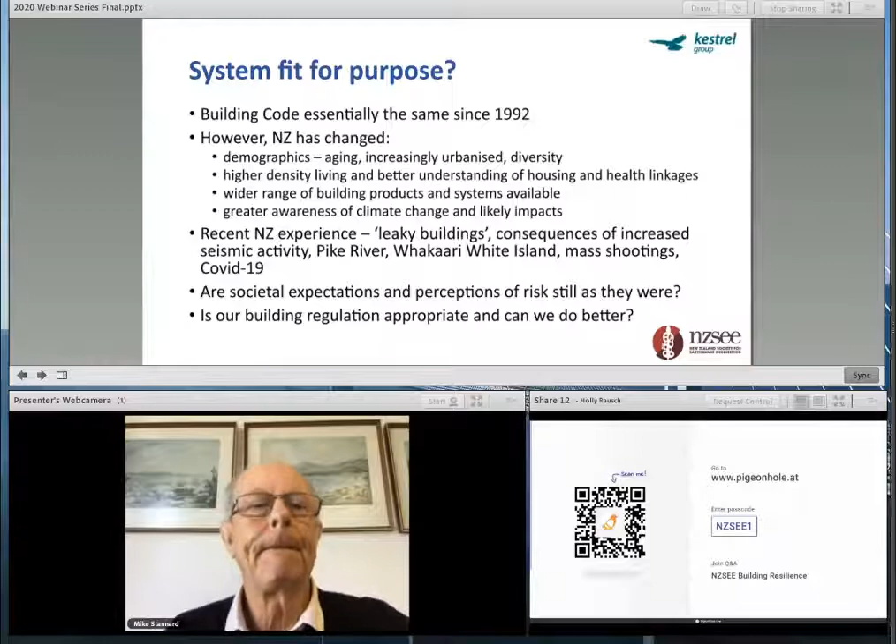I like the quote from the European philosopher George Santayana: those who cannot remember the past are condemned to repeat it. Therefore, a quick reminder of code development history.

The first known building code was from ancient Mesopotamia, 4,000 years ago, the Hammurabi Code. It was pretty brutal - if a homeowner is killed because of the house construction, the builder is killed.

It did perhaps recognise that information asymmetry between builder and owner is still very much a driver for today's codes. More recent drivers for code development have been major events - we've had the Great Fire of London, and a number of earthquakes. Codes have traditionally addressed life safety and health issues, but they're now increasingly being used as an instrument of social policy to help address wider societal objectives, such as well-being, energy efficiency, sustainability, and resilience.

It does need to be remembered that the code is only part of the picture. The building code system is only one part of a much wider system that will influence outcomes. These include commercial arrangements and drivers, New Zealand legal and taxation systems, liability, access to finance, insurance, expectations of users, research and knowledge, land planning, consents approvals process, and the competence and ethics of all parties to the building process.

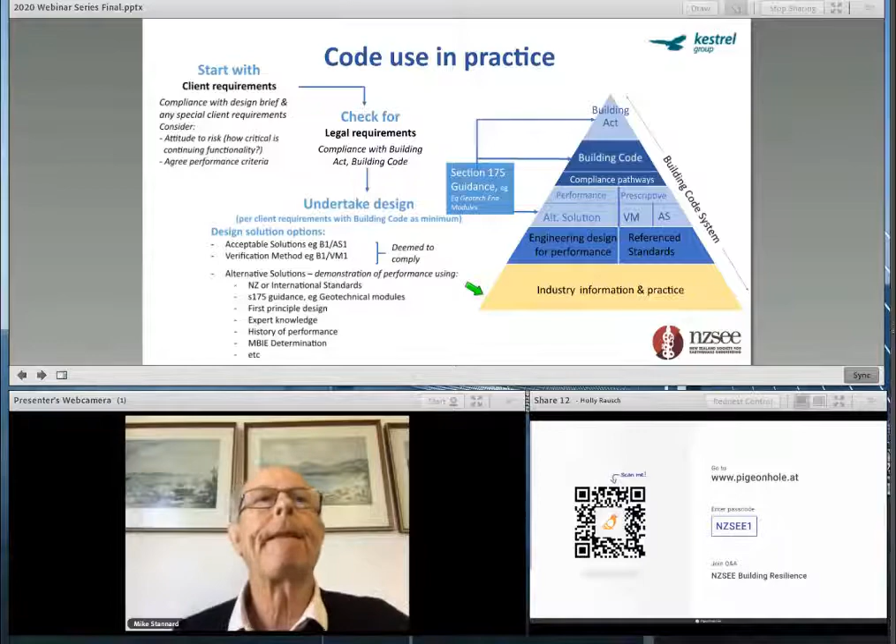So what is good building regulation? The list here is adapted for building regulations from the New Zealand government expectations of regulators. It should reflect societal expectations, recognising the social compact between Parliament and people. It needs to be aligned with other regulatory systems, constitutional principles and treaty obligations.

It needs to be proportionate and fair to all parties. It should be clear, easy to access, and easy to interpret the requirements. It should be flexible, proactive, and evolving, responding to changing circumstances or new information. It's not a set and forget type system.

It should encourage affordable and efficient building practices and promote innovation. And it needs to reflect current knowledge and sector competence and practice. And it's important, as poor regulation can impose costs, limit freedoms, stifle innovation, and give rise to unintended consequences. And there have been plenty of examples of that.

So what's been our New Zealand experience? We've had the leaky buildings issues, costing billions and causing a lot of pain and distress to thousands of homeowners.

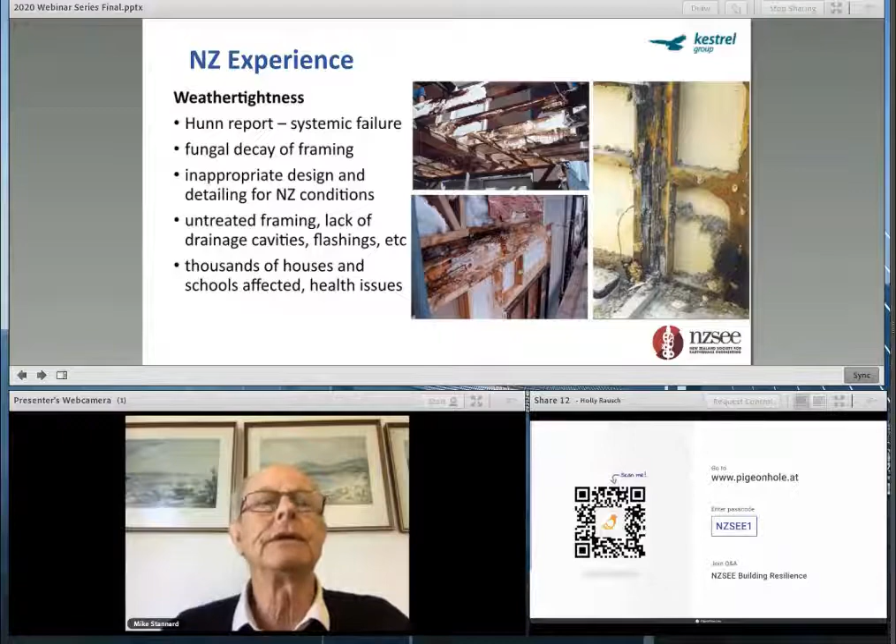We've had a real increase in seismic activity since the mid-2000s, which has led to a much wider awareness of the impacts of earthquakes and the vulnerability of our built environment, than we'd had in the relative quiescence of the second half of the 20th century.

The experience has also led to much greater understanding of building and ground performance and seismicity, and many changes occurred in no small part due to the work of the Canterbury Earthquakes Royal Commission and to the collaborative efforts of the earthquake engineering community. This new learning from earthquakes has been captured and consolidated with important research from the likes of QuakeCoRE, Quake Centre, the universities, GNS, and other organisations, much of it funded by MBIE and EQC.

We can and have learned from international experience, and I would say we must learn from international experience. But it's important to be mindful that the context in other countries can be quite different. The World Bank emphasises the importance of good building regulation, illustrated by developing countries being disproportionately affected during natural hazard events.

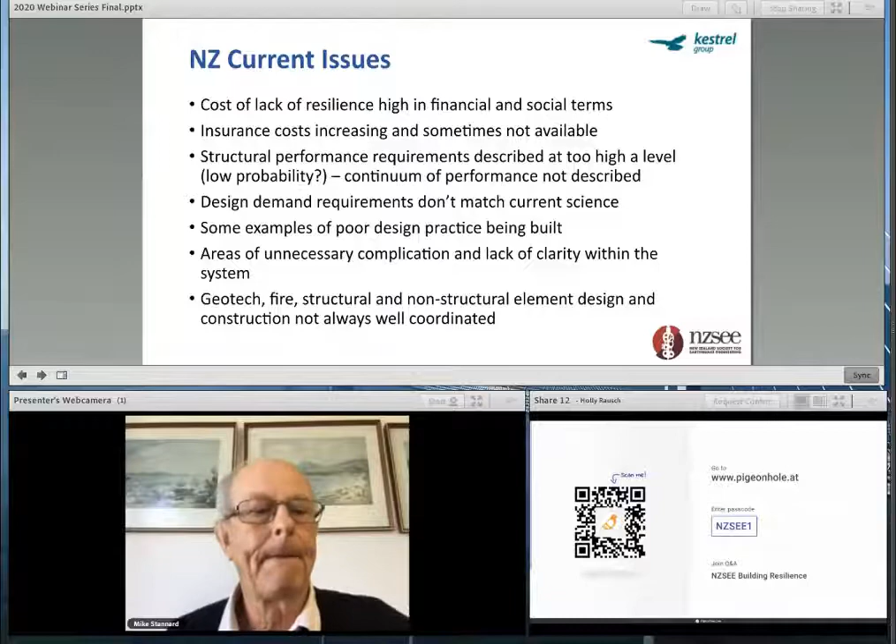I make a few suggestions that I believe will make a difference in relation to seismic resilience and code clarity. Firstly, currently the Act and Code really only address life safety. There should be a debate seeking views from the public about incorporating property protection into our building requirements. The Wellington Mayoral Forum is already calling for this to happen. Japan does it, and we've seen the results.

I've often heard New Zealand couldn't afford this, and it is something we'll need to address robustly. However, on a GDP per capita basis, Japan and New Zealand are very similar. They can do it. Why not us?

Secondly, I've mentioned the trend internationally is to have performance-based building regulation, but with better definition of performance somewhere in the code system. What do we mean by low probability of rupture? This is currently left to standards committees to define, when it's a public policy issue and should not be their responsibility. However, getting too prescriptive in a mandatory code requirement is fraught, as predicting earthquake performance is very difficult. We've had this before when more prescriptive criteria were added into the fire code, causing considerable unintended consequences.

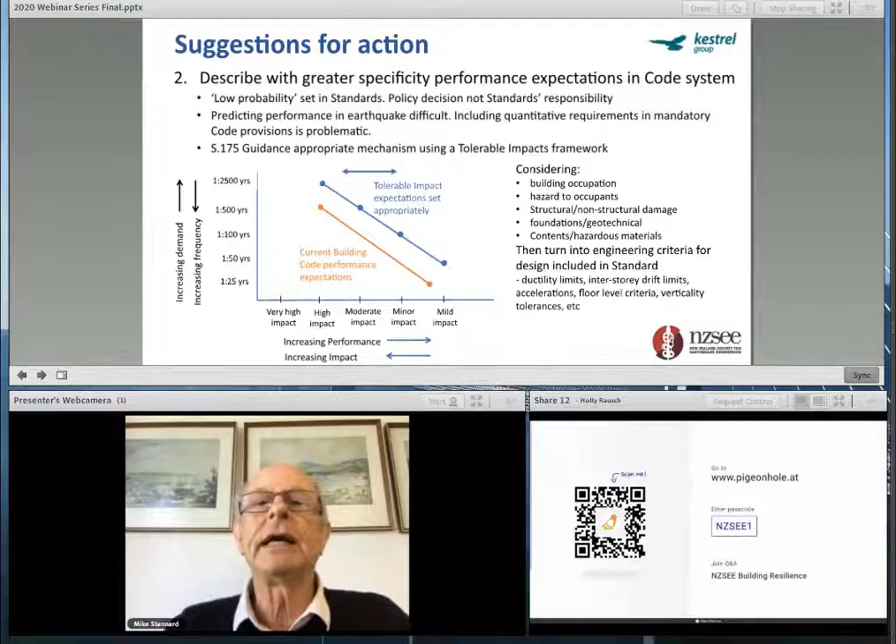Rather than being included in the code, I'm suggesting that could be signalled in statutory Section 175 guidance, providing direction to standards committees to turn these descriptions into engineering criteria and limits. The power to issue guidance was added to the 2004 Act specifically in response to the lack of clarity about weather-tightness issues. Let's use it, or some other non-mandatory mechanism, to provide greater clarity.

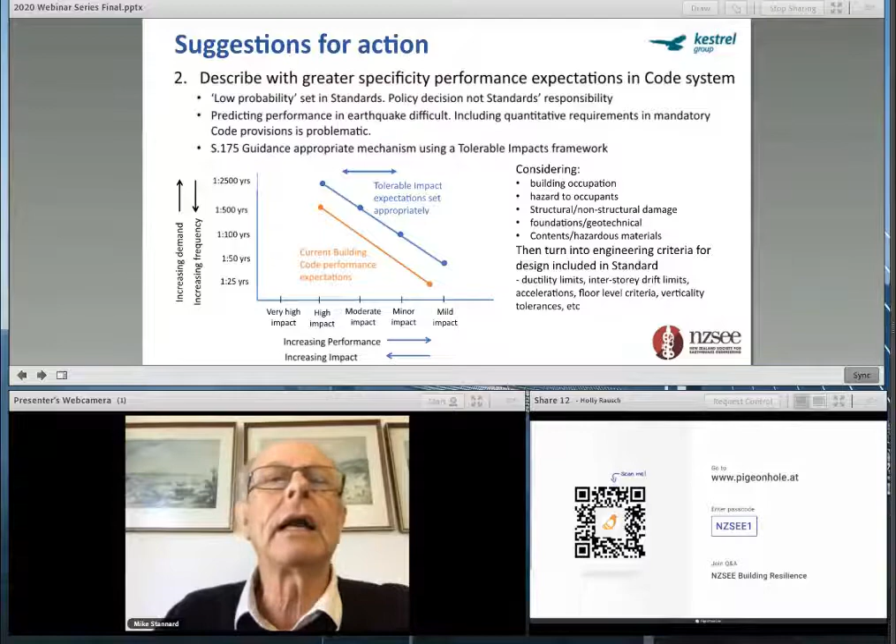Very briefly, I add three other suggestions. Thirdly, review and consolidate all the building classification systems currently included in the code system to simplify and provide greater clarity. Additionally, the classification should consider the impact that the building has on other buildings and on the wider urban environment. Which buildings are really the most important that should be designed more robustly?

Currently, there are at least six different classifications within building controls, let alone anything else outside of the Building Act. You've got two lots of importance levels, either the A3, or 1170 for structural, and they're not identical. You've got risk groups for fire, change of use provisions, and risk groups in F6 visibility and means of escape. These silos are confusing, unnecessarily complicated, and only consider a building singly, not how it interacts with other buildings and the community.

Fourthly, introduce a random audit system of designs to improve code compliance. And fifthly, undertake a fundamental design review of design standards and verification methods, aligned with the tolerable impacts set per suggestion two, and classifications per suggestion three.

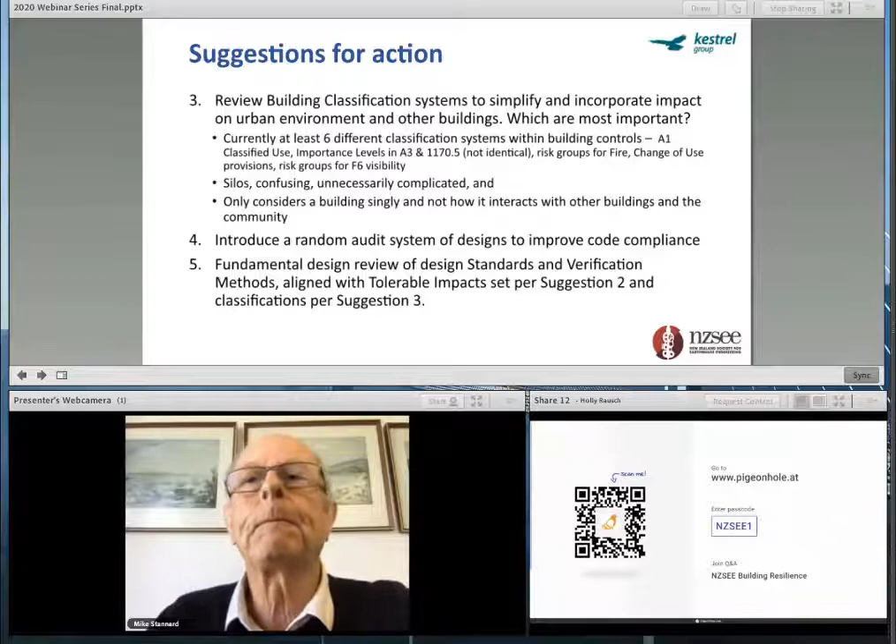Change isn't easy, but I'm reminded that I have heard the piercing screams of a woman already traumatised by the Darfield earthquake, desperately trying to escape from the high-rise Christchurch Central Police Station during a major aftershock. Some of us have listened to the families of victims of the Christchurch earthquake, asking why. Many of us have experienced, either directly or indirectly, the stress, anxiety, and anger of having to repair or rebuild homes damaged by earthquake or leaky building issues. All of us will hope that our children or grandchildren will not, in the words of Santayana, be condemned to repeat our experience.

The opportunity is now. It needs boldness, imagination, and informed evidence. A partnership is required, with MBIE as the steward of the system, the sector providing coherent and informed advice, and a wider collaboration with all community interests. Let's do it for the sake of New Zealand's health and well-being.

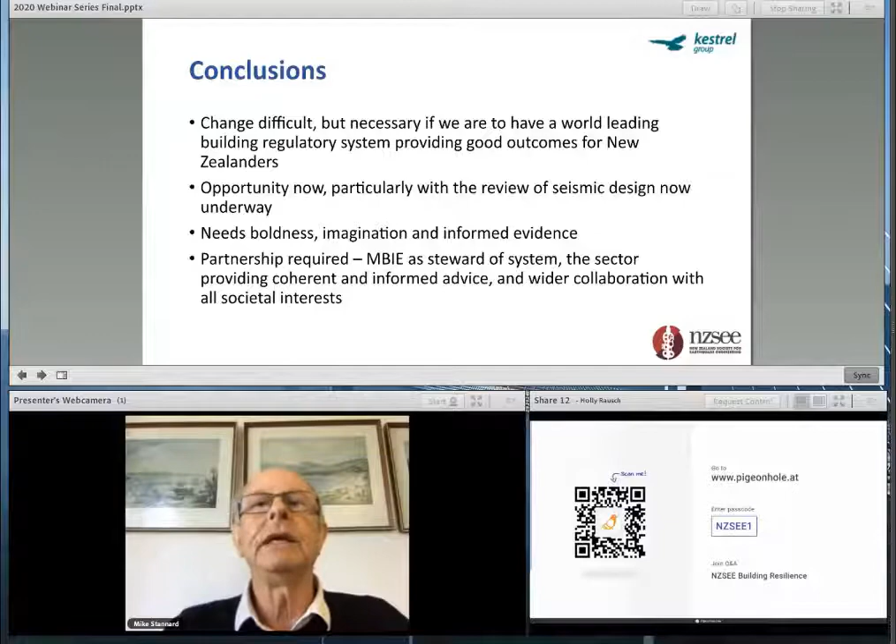Kia ora koutou, welcome and thank you for the opportunity to speak at this seminar. I'm Jenni Tipler, Engineering Team Leader with MBIE's Building System Performance Branch.

MBIE's Earthquake Engineering Work Programme is about doing the right things and prioritising the work that will have the biggest impact, remembering that as public servants we are here first and foremost to serve the public. Making sure that we're looking across the whole building system, from existing buildings to new buildings and buildings of the future, and never losing sight of the reason we do what we do, which is to protect people from harm.

But it's also about doing things right, ensuring that our work is part of a well thought out strategy and that we're taking the best approach. This means we have to leverage all of the resources at our disposal. My team has 8 engineers, and that's not nearly enough for us to make the changes that need to be made alone. Doing things right means reaching into the sector for advice, expertise and wisdom that far exceeds our own, and creating partnerships that enable us to transform the way that buildings are designed and constructed.

MBIE take our Earthquake Engineering Work Programme seriously. We have a well thought out strategy and approach that will evolve as we learn and continue to refine it. But it represents a big focus for my team and a considerable investment of time, money and effort.

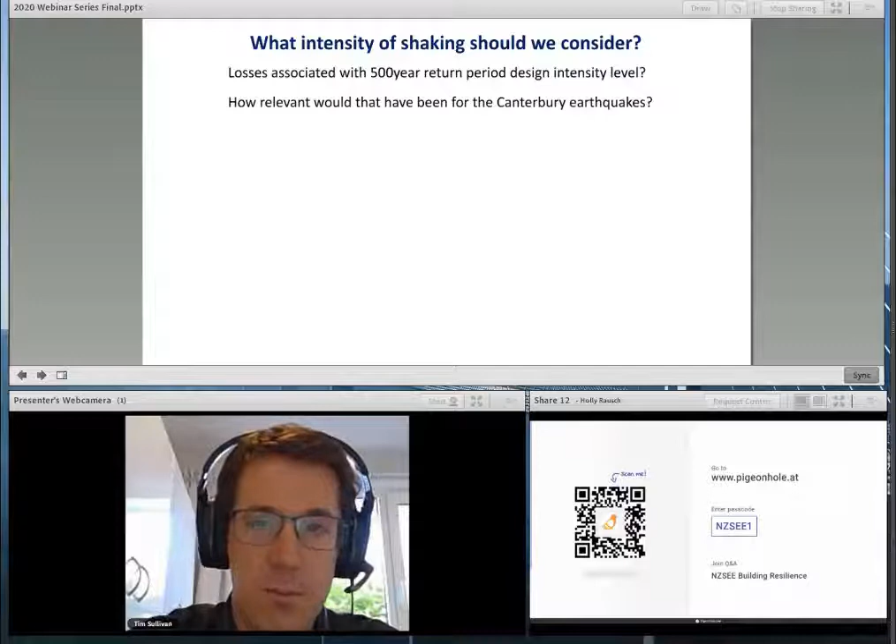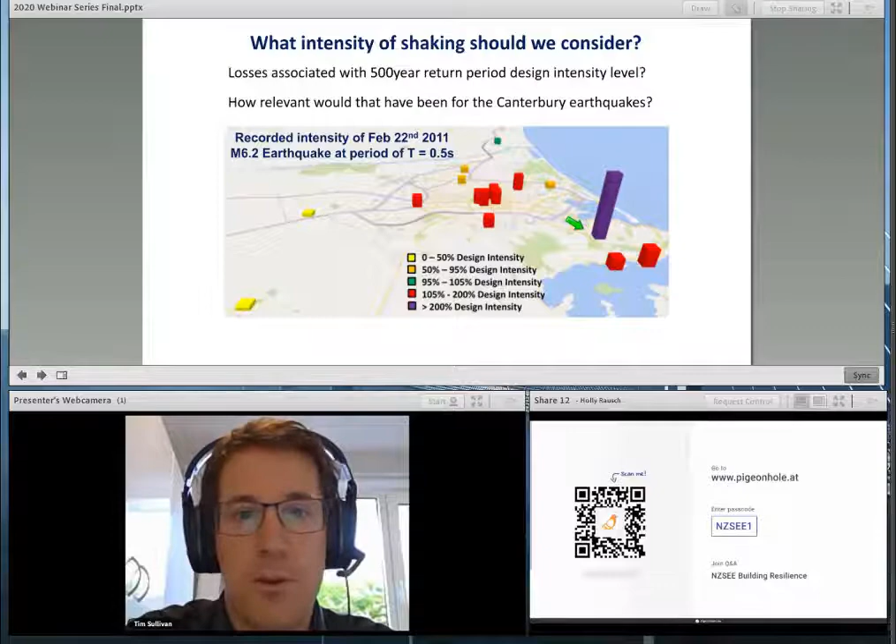If we instead went to a period of 3 seconds, the picture changes completely. We can see that the site that was previously 6 times is now at the 500-year intensity level. So why am I highlighting this?

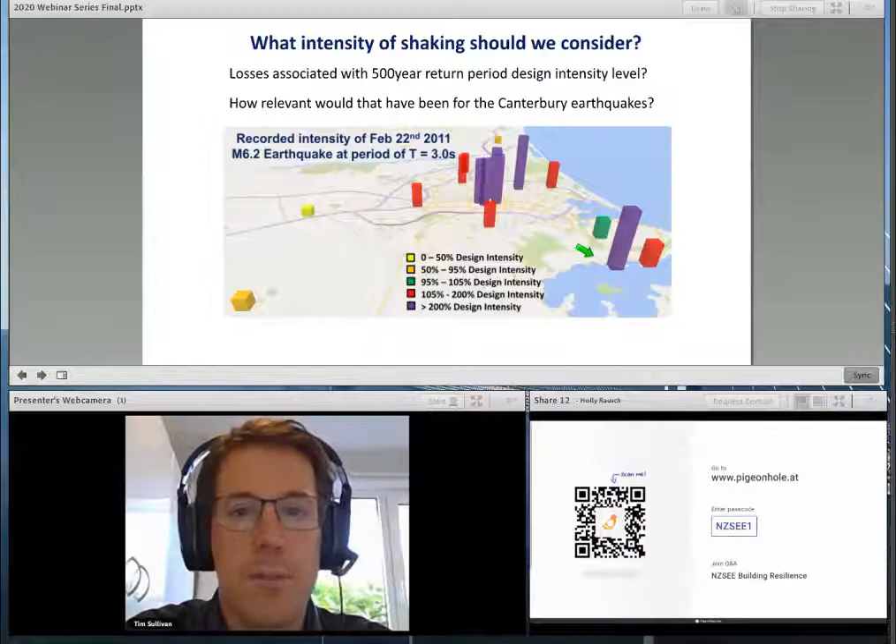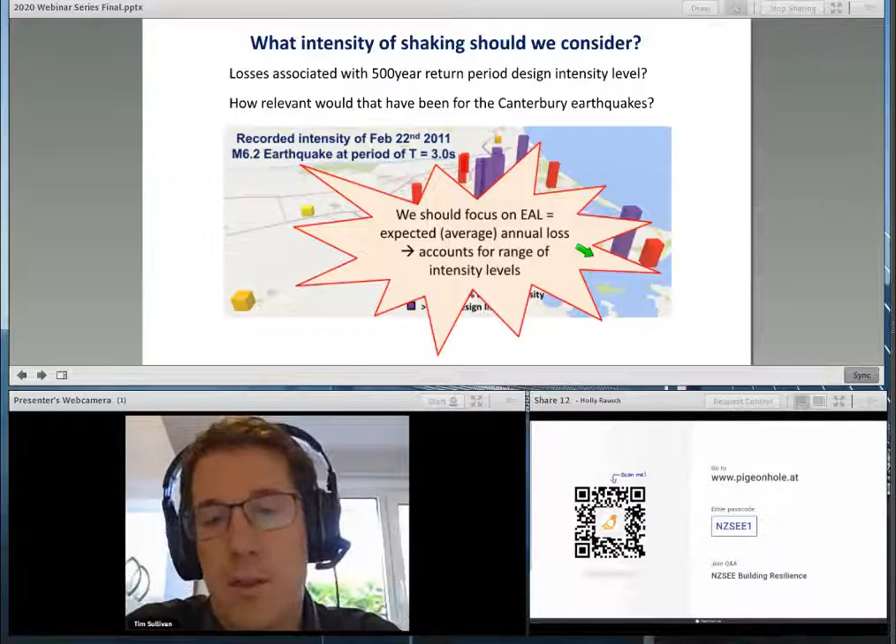The main point is that in an earthquake, we have a whole range of different intensity levels, and for this reason it makes little sense to talk about losses at a specific intensity level. Instead, we should be looking at the expected annual loss, sometimes referred to as the average annual loss, because this is a loss measure that accounts for a whole range of intensity levels expected at a site.

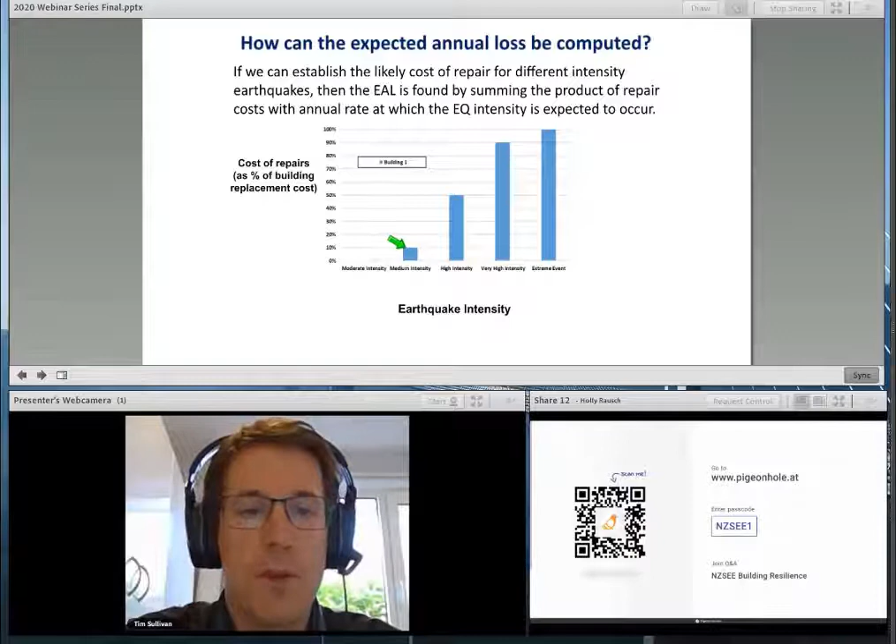So how is the expected annual loss computed? If we have information as shown in this picture, which shows the cost to repair a building as a function of earthquake intensity, you can see 5 different intensity levels here. If we had a medium earthquake intensity, we'd expect the cost to repair the building to be about 10% of the replacement cost. If the earthquake intensity is high, we think the repair cost is about 50% of what it would cost to replace it, and so on.

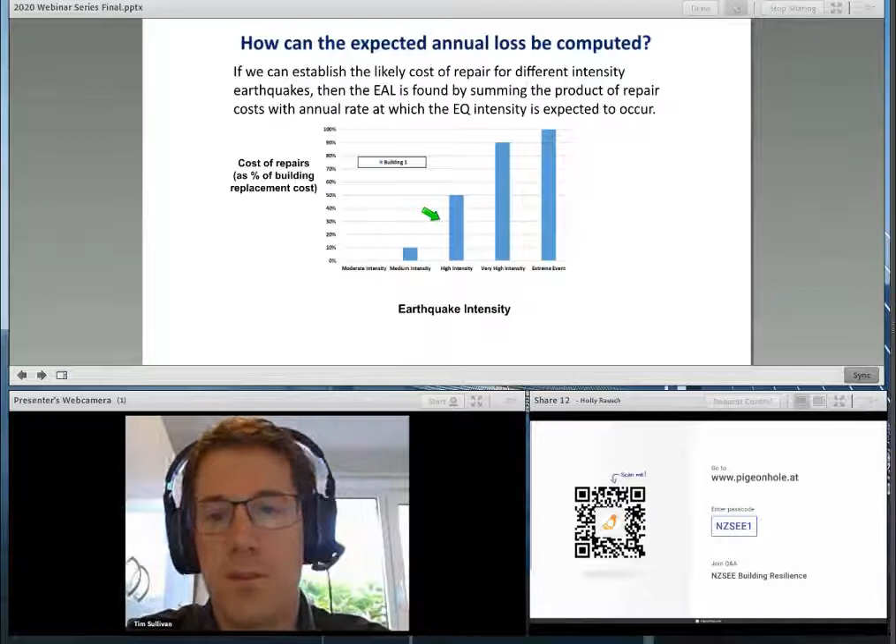Now, with that sort of information, if we combine it with the rate at which we expect that earthquake intensity to occur, we can multiply the numbers together and work out our expected annual loss. So it's simply 1 on 25 times 10%, plus 1 on 400 times 50%, and so on. We sum those up and get, in this case, an expected annual loss, or average annual loss, of 0.66% of the building replacement cost.

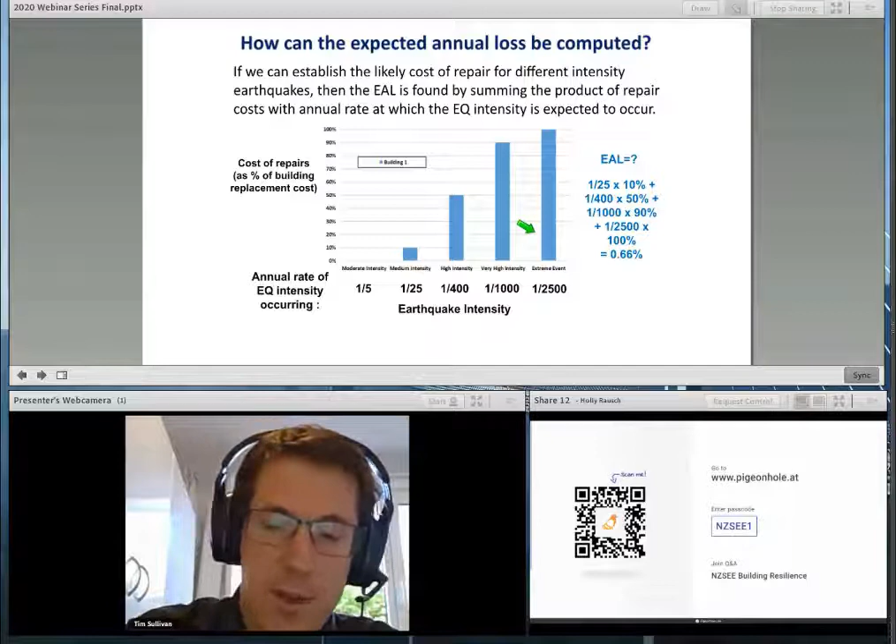So then the question is, how would we establish a relationship between the repair cost as a function of intensity? We do that through a 3-step process, which is what we've been doing in our research. First is structural analysis, where we build a model of our structure and ask what drift we expect if the earthquake intensity is, say, 0.4G at the period of vibration of the structure.

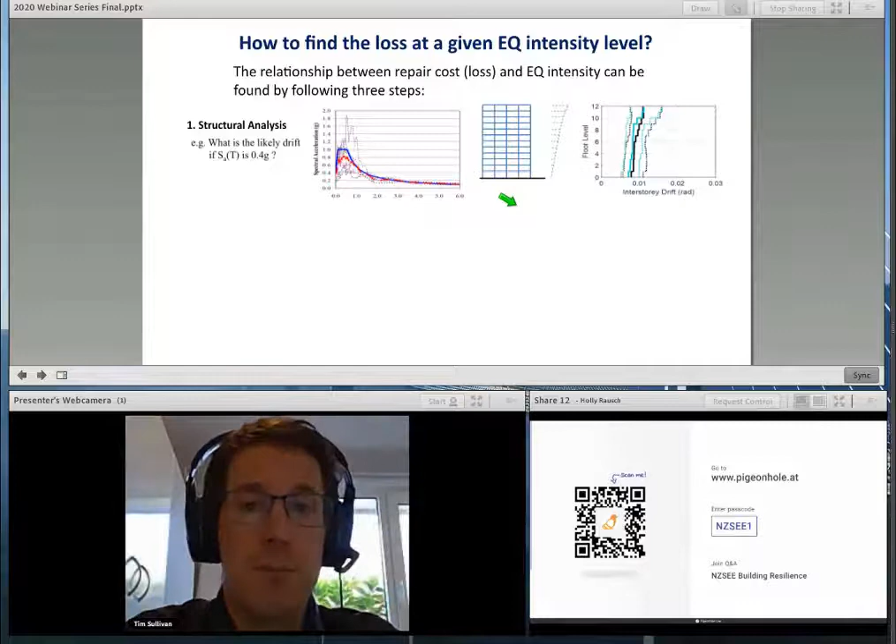We select ground motions compatible with that intensity level and run time history analyses to work out drifts and floor accelerations, which become inputs to the next part of the assessment: damage analysis. That's where we say if the drift is, say, 1%, what is the likely damage to, for example, a partition wall? Of course, we need to consider all damageable components in a building.

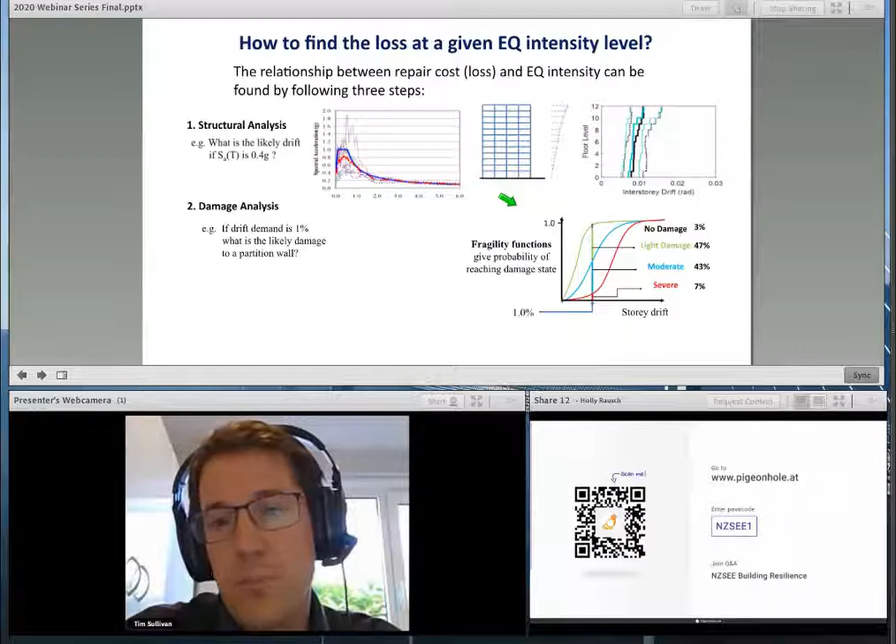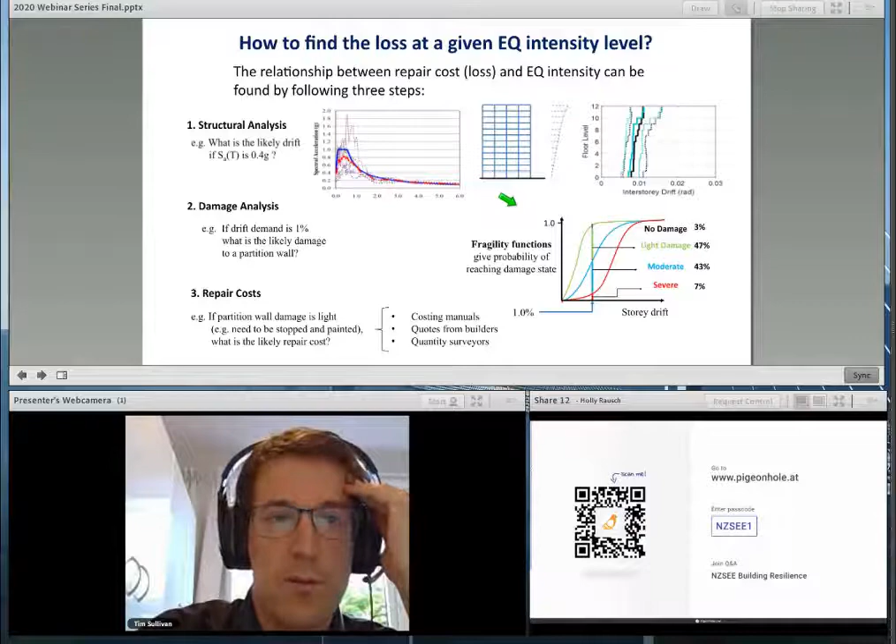To do this, we need information on the fragility of the components. These could be fragility functions for partition walls, and we read in our drift of 1% to get the probability of being in a certain damage state. If we identify, say, light damage, we go to the next step: repair costs. For a partition wall with light damage, we might need to stop and paint the walls, and we estimate the costs of that work. Through this process, we can estimate the cost of repairing all components at that intensity level, and repeat it for all intensity levels of interest.

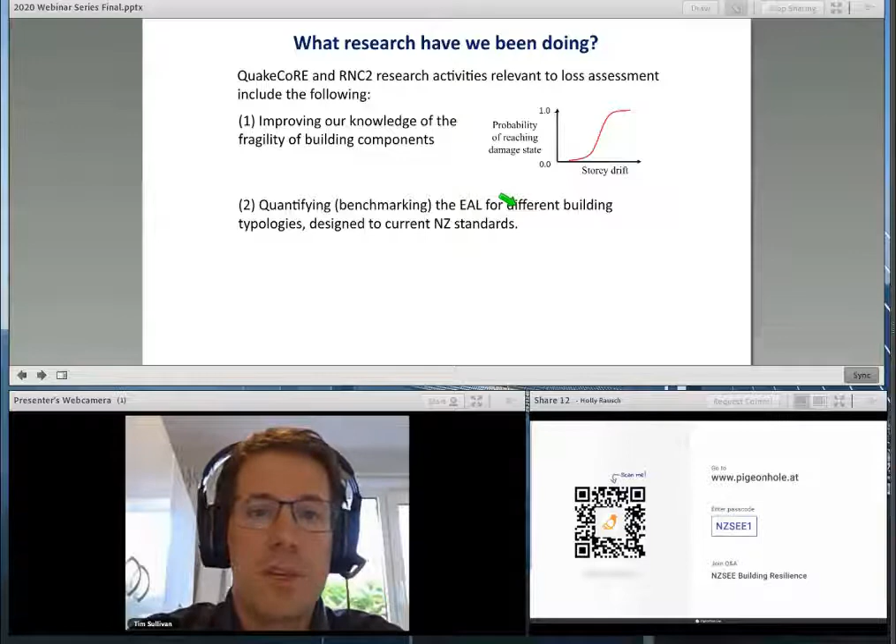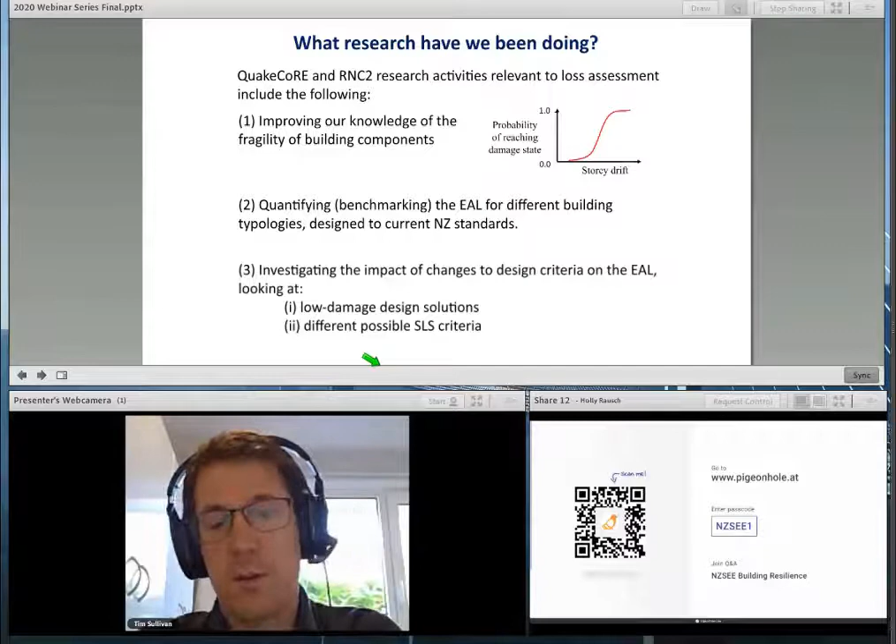So what research have QuakeCoRE, and now the Resilience to Nature's Challenges, been doing in relation to loss assessment? We've been doing three things: improving our knowledge of the fragility of building components, quantifying or benchmarking the expected annual loss for different building typologies designed to current New Zealand standards, and investigating the impact of changes to design criteria on expected annual loss, including low damage design solutions and different possible serviceability limit state criteria.

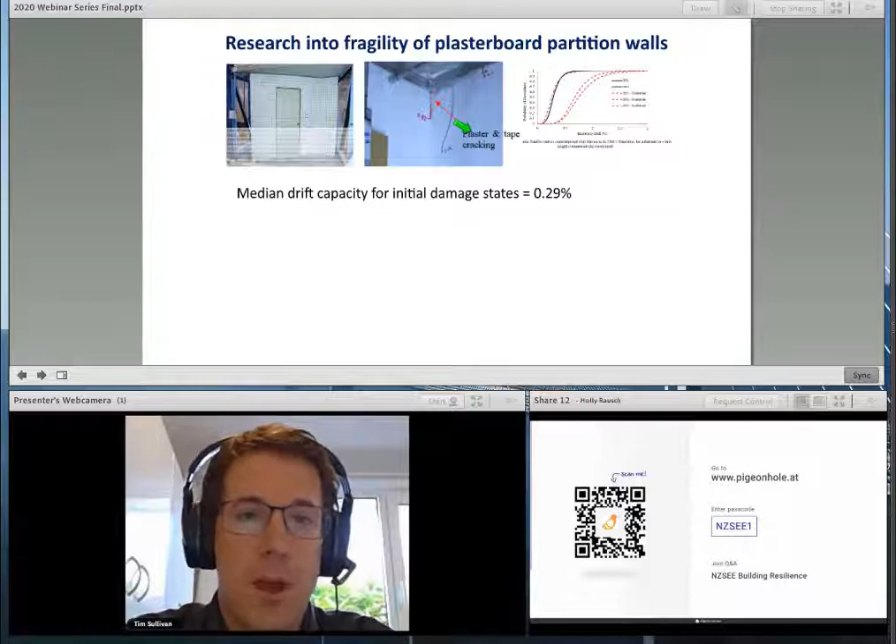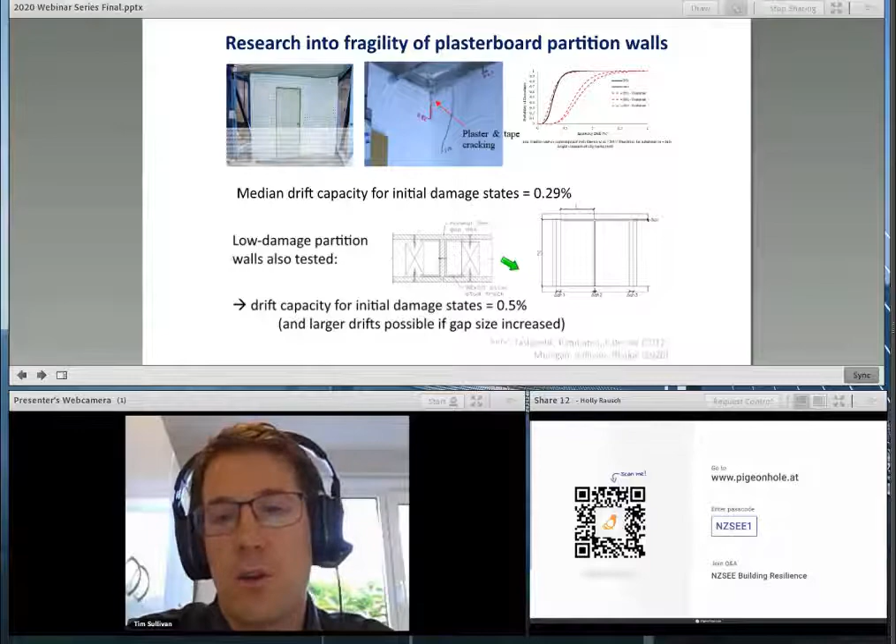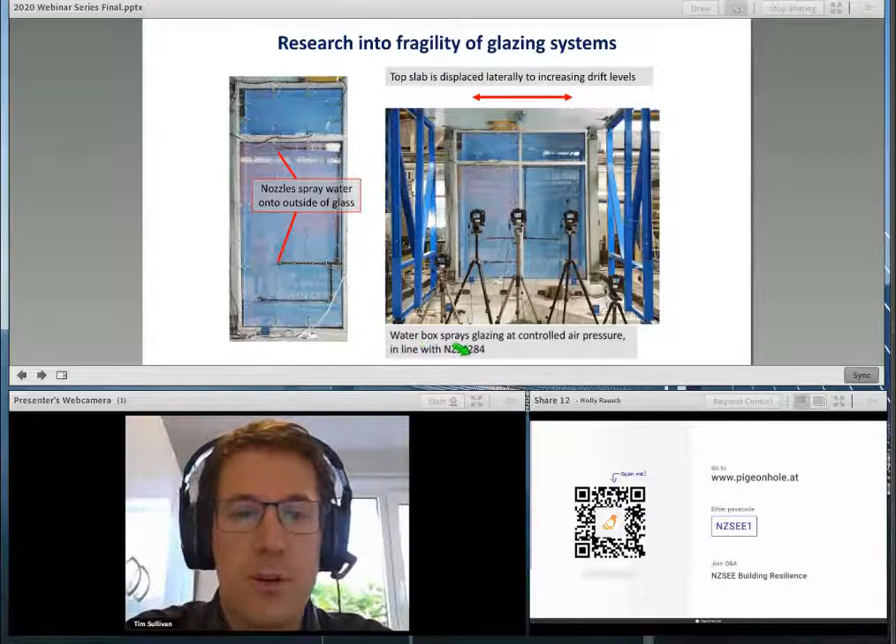Another interesting study in fragility looked at commercial glazing systems. This is a photo of a 3.6 metre commercial glazing system, fairly standard in New Zealand. Behind it is a water box with nozzles designed to spray water onto the glazing. In this test, we racked or displaced the top floor laterally to higher drifts, and after every couple of cycles at a certain drift level, we would spray the glazing at a controlled air pressure in line with New Zealand standard NZS 4284.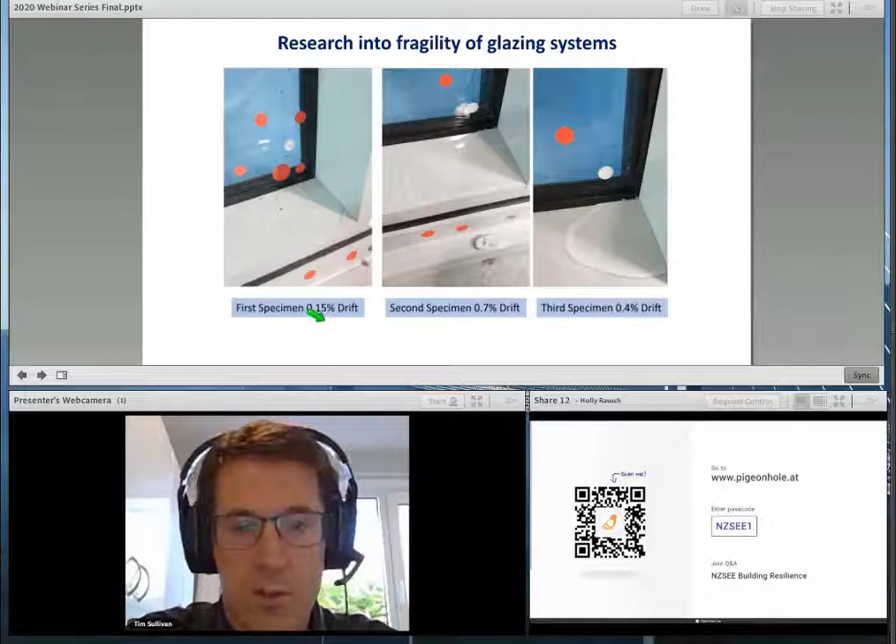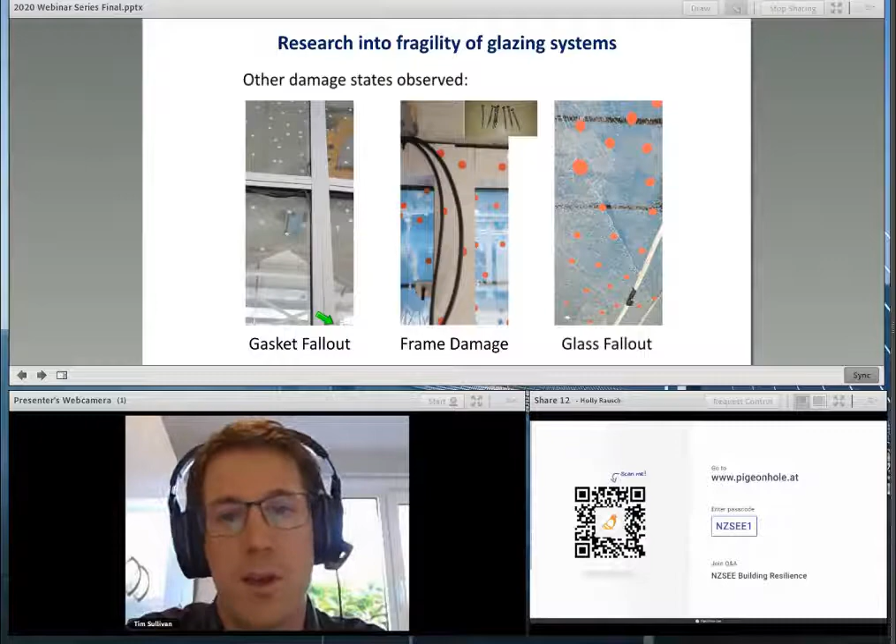From that process, we tracked the drift at which we start to see loss of water tightness. For some specimens, this occurred at reasonably low drifts—one as low as 0.15%. Of course, as we go to higher drifts, we see more signs of damage: gaskets falling out, glass breaking, and so on. But those damage states don't occur until much higher levels of drift.

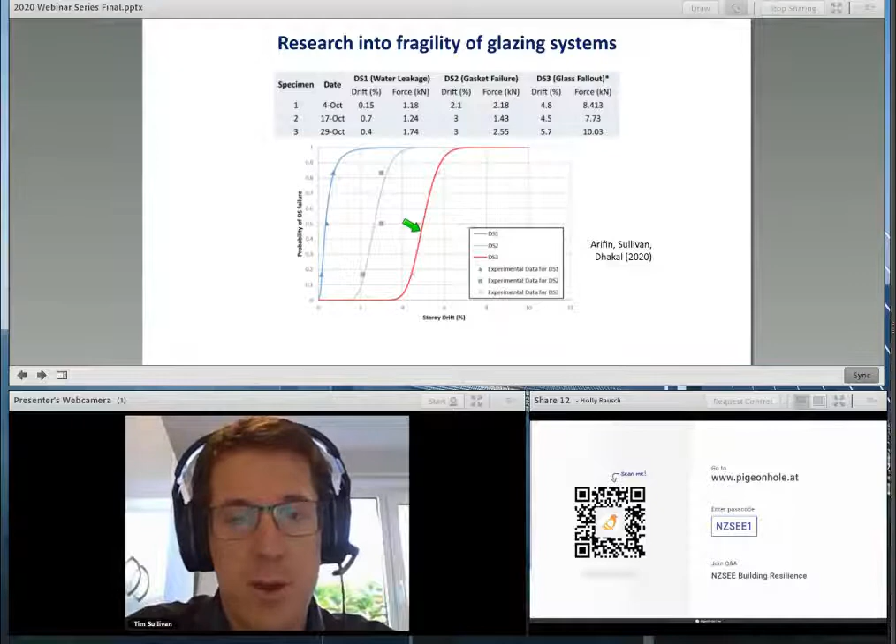This is a summary of results for that first series of tests, and we saw drifts up around 5% for a life safety issue. So life safety is not really a concern if we can sustain about 5% before the glass breaks. But serviceability is an issue, because the median drift capacity for this glazing, for loss of water tightness, was 0.35%.

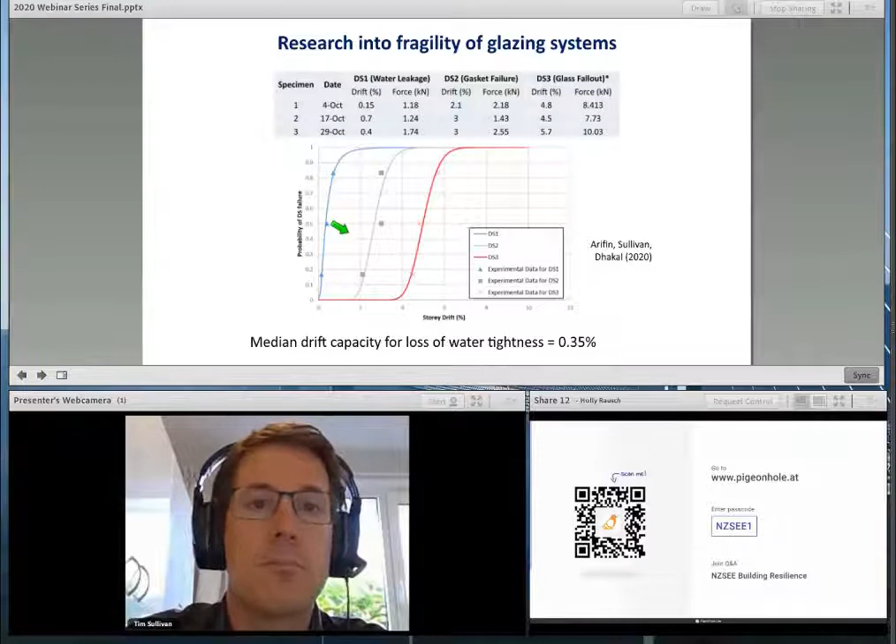Other research of relevance for loss assessment was looking at losses in terms of quantifying repair costs knowing the damage. Professor Dhakal's been doing quite a bit of research in this field.

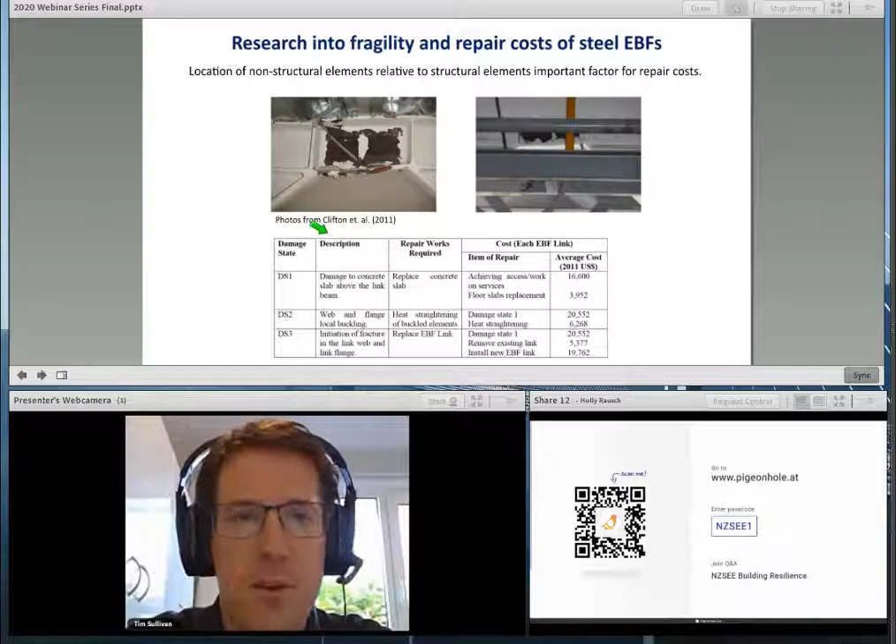This specific slide shows research building on work done by Clifton et al. on EBF systems, where we recognised, talking with industry, that the cost to repair these links is greatly affected by how easy it is going to be to access and do the repair works. So if you look at our repair cost functions, a lot of the cost was associated with actually removing and then reinstating non-structural elements, including services and the like, within the damaged zone.

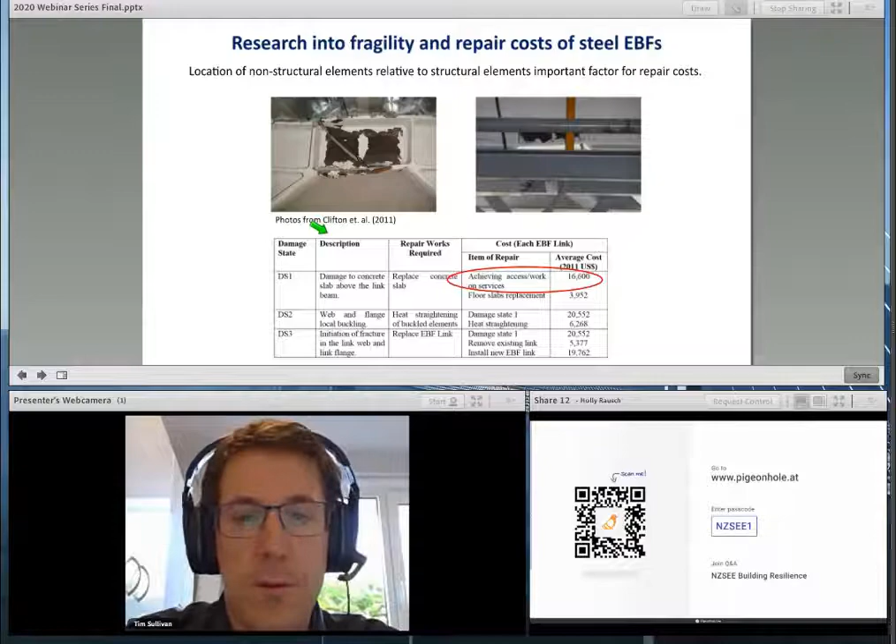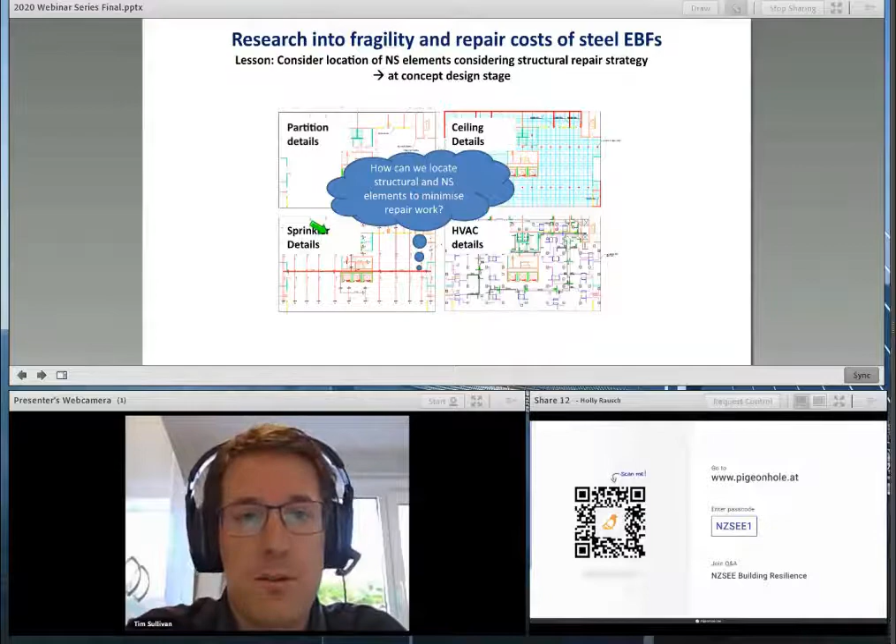Of course, that makes us wonder if we should be reconsidering our concept design approach. Arguably, it would be great if during our concept design we could locate our non-structural elements away from the parts of our structure that are going to require repair. That's perhaps a challenge for our future concept design strategies.

I also wanted to show you these figures, drawings of the QuakeCoRE case study buildings. We developed these layouts and drawings in consultation with industry, talking with engineers and architects, to come up with what was considered a realistic office or commercial type building layout. This is the level of detail we need to be able to do a detailed loss assessment study.

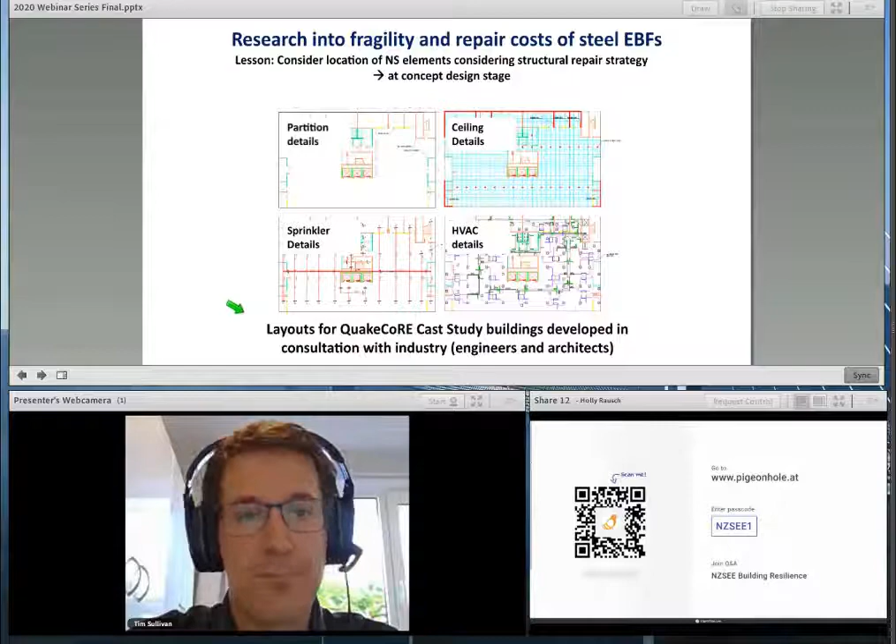With this sort of information, we can then do studies like this, where we designed those QuakeCoRE case study buildings as moment-resisting frame structures. We designed them for sites in Auckland, Christchurch, and Wellington for buildings of 4 and 12 stories. In this first study, we designed them as moment-resisting frames two different ways: one with a traditional type of beam column connection, and one with a low damage friction type connection. We wanted to see what was the impact of those two different connection types on the overall losses.

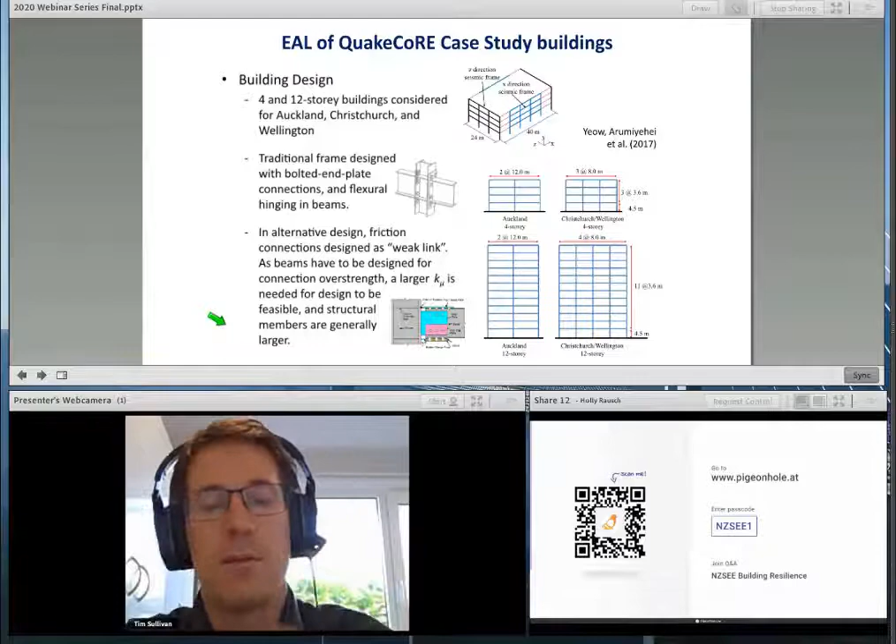Everything else in the building is the same, the non-structural elements and so on, but the only difference is the impact of those connections. Of course, the design approach is slightly different for the two connection types.

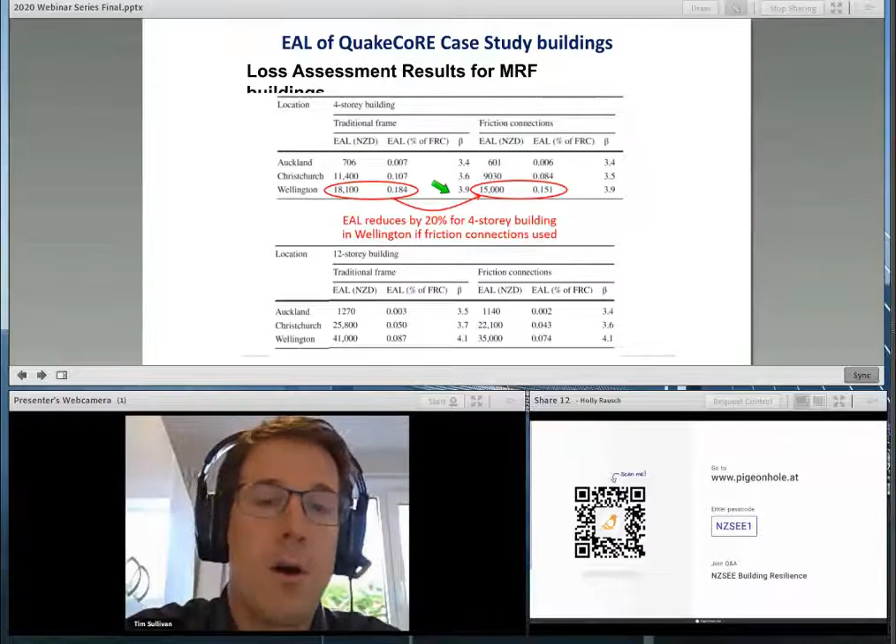What we found here is that if you look at the expected annual loss for these two buildings, there are 4 stories on the top and the 12-story at the bottom. Traditional frame loss, the expected annual loss for a 4-story building in Wellington, was expected to reduce by about 20% if we use friction connections. So we can see how loss assessment here can be useful in highlighting the potential impact of what would otherwise be considered two exactly similar code compliant buildings.

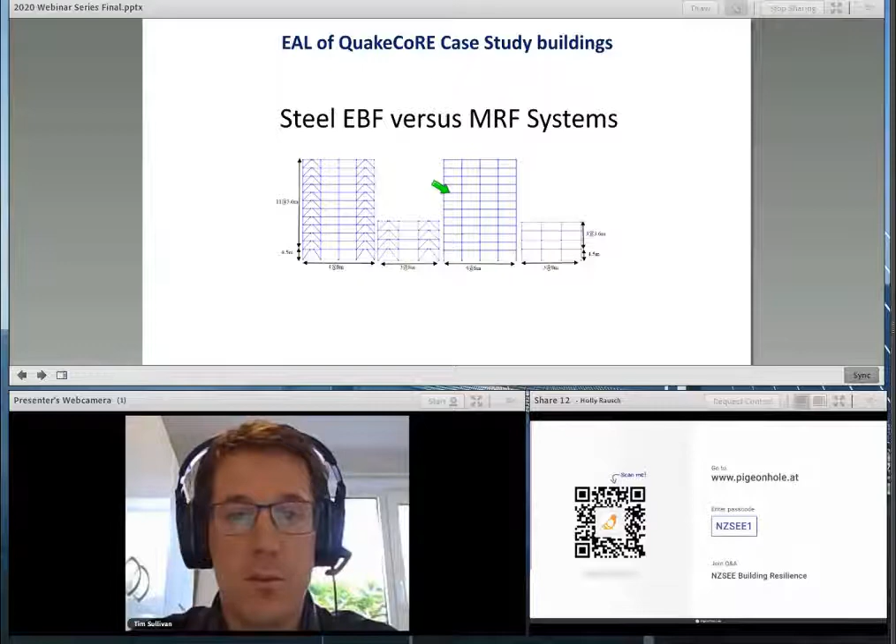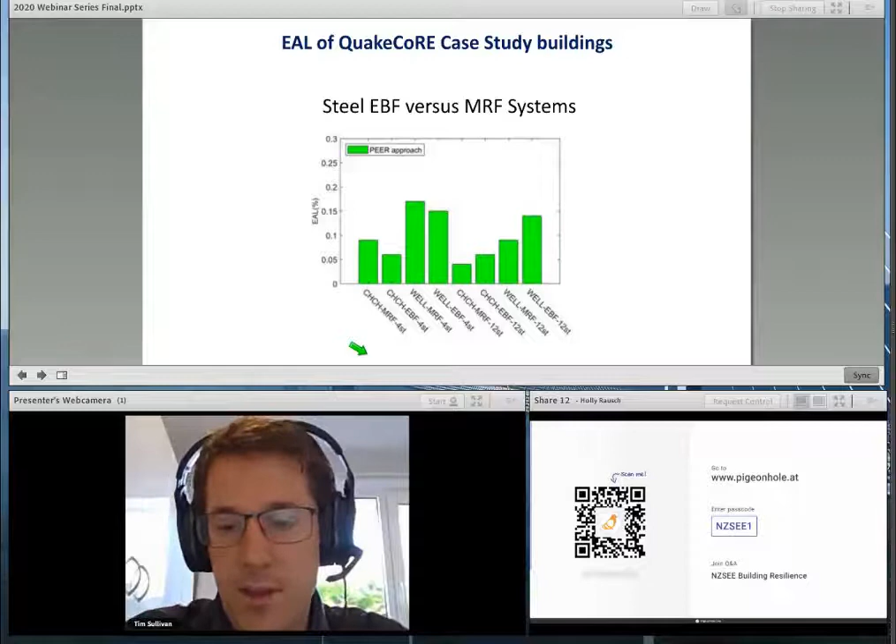This is partly to do with the way that floor accelerations change and are more significant in the 12-story building, and it's also to do with the drift profile. These results are also affected by the quantities of our non-structural elements. So in reality, this is showing that there are going to be a number of factors affecting our expected annual loss for a building, depending on building typology.

We've also been looking at concrete wall buildings. This study investigates the impact of using long walls versus more short walls. We said, let's design this building in the first instance with a number of 6-metre walls, and in the second instance with more 3-metre walls. Both designs done exactly to meet the New Zealand standards, and then we do our loss assessment studies.

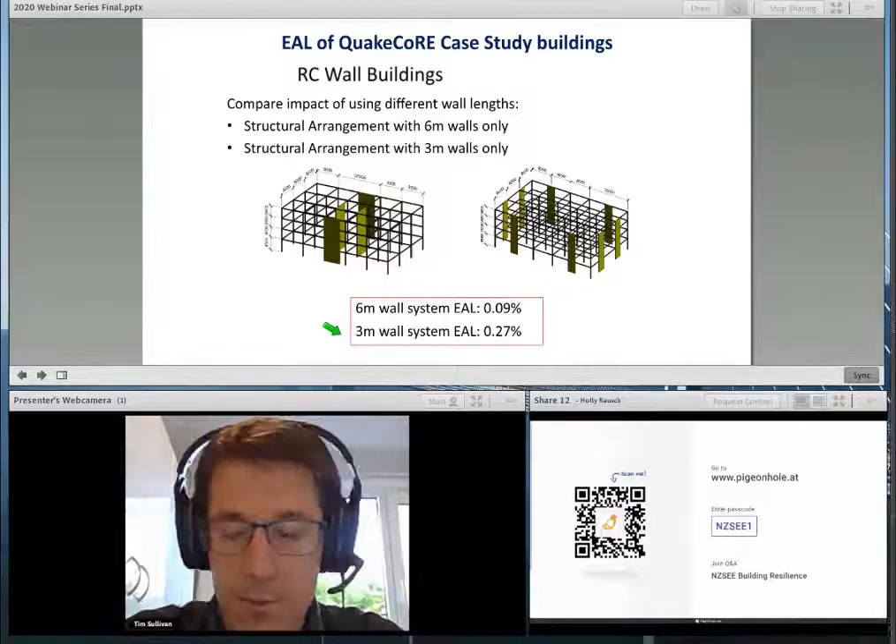In this case, it was interesting to find that the long wall system ended up with about a third of the expected annual loss of the 3-metre wall system. There are a couple of main reasons for that. One is because the 3-metre wall system tends to have more drift, and the other reason is because we have more walls that require repair once damage does occur, and this tends to have a bigger impact on the expected annual losses.

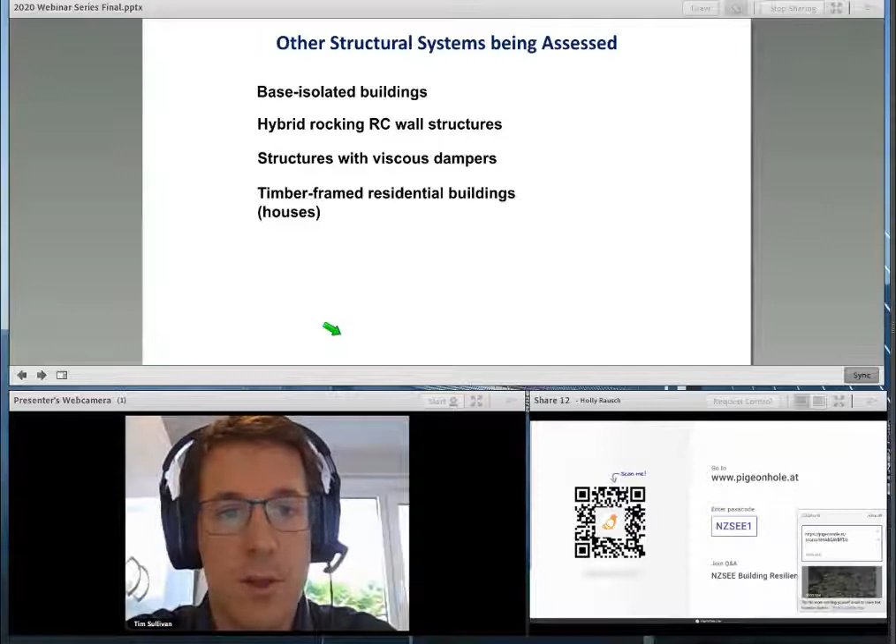We continue to research into other building typologies, including low damage buildings such as base isolated buildings, hybrid rocking wall structures, and structures with viscous dampers. We're also looking at housing. Mike pointed out that our housing was really good from a life safety point of view, which is true. But we recognize that from a losses point of view, we do need to help reduce the damage and disruption to housing as well.

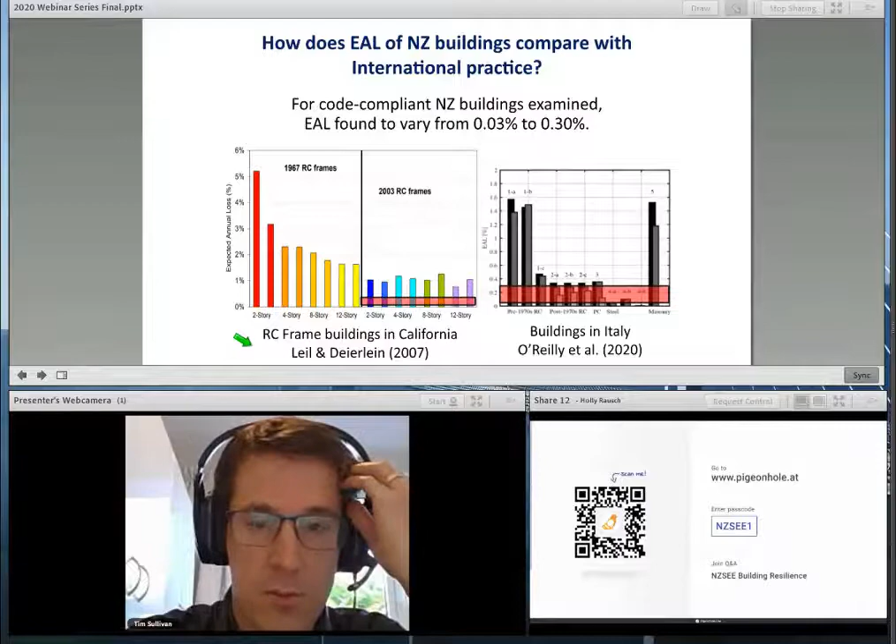If you put those on the graphs found in the literature, you can see that California, with much higher seismicity for concrete frame buildings—and I haven't got results yet for concrete frames here—but they're quite higher in California. Whereas if you look at our results in relation to results in Italy for new buildings, they're similar, and you can see the steel buildings quite low in Italy. But again, it does depend on the seismicity.

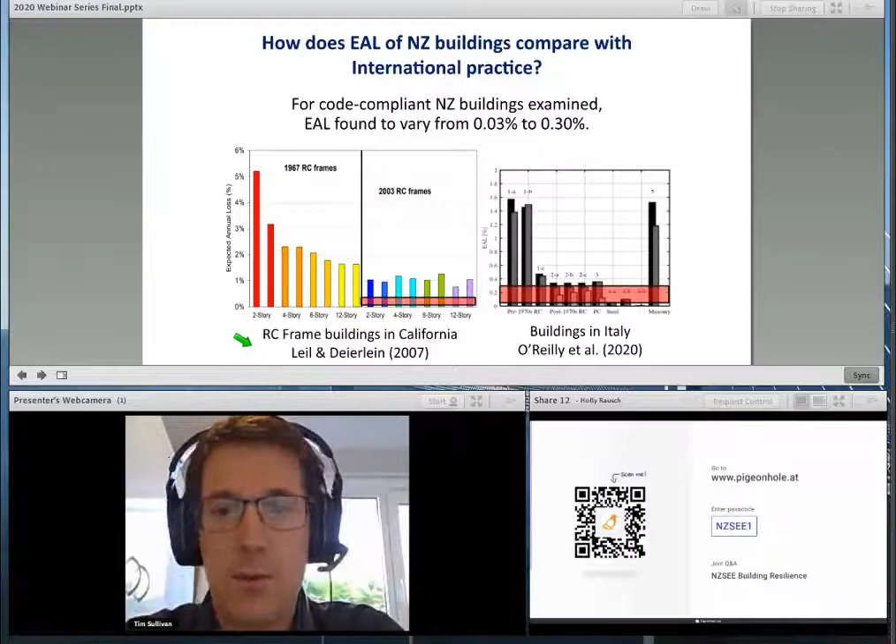Into the final part of why we're doing this, we can start looking at the impact of our seismic design criteria on losses. One topic we're interested in is the serviceability limit state. There have been recent proposals to change the serviceability limit state design criteria to increase the return period from 25 to 50 years. This was proposed by Moore as well as Pettinga, with slightly different suggestions about what the drift limit should be for the serviceability limit state.

So what we'd like to see from our research is how effective such changes would be in limiting losses, and then ask the question: is there a more effective approach?

To help answer that question, here are some results of loss assessments done internationally, from different studies. What I wanted you to notice from these results, which show repair cost as a function of intensity, is that repair cost—this is total building repair cost—tends to increase in a roughly linear fashion. Roughly linear because, and this means we can make this approximation, it's just an approximation, we don't expect to see any loss

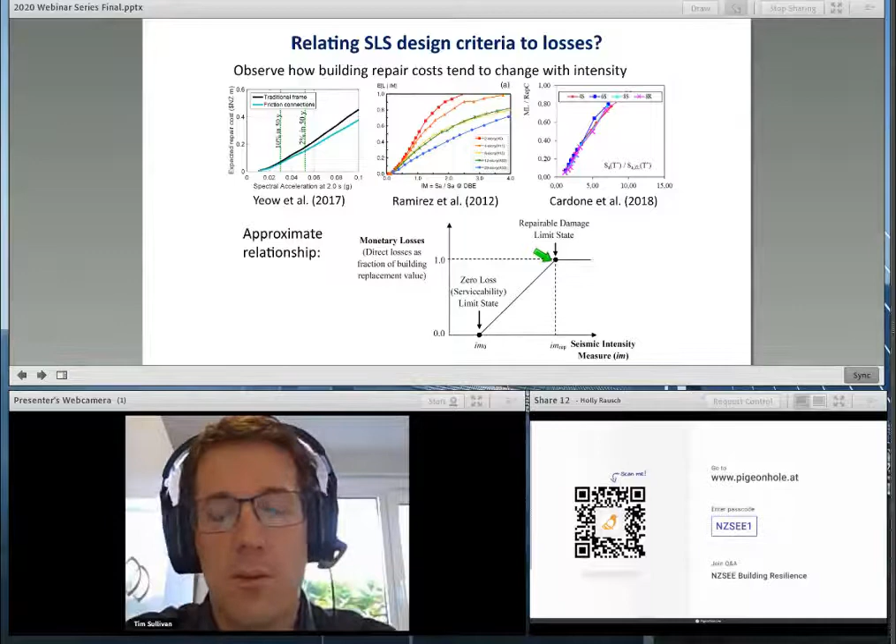until we get to an intensity that causes our serviceability limit state to be exceeded. After that point, we think losses are going to increase in a relatively linear fashion up until the point we have to basically replace the building. For shaking intensity higher than that, of course, the repair cost is equal to the replacement cost.

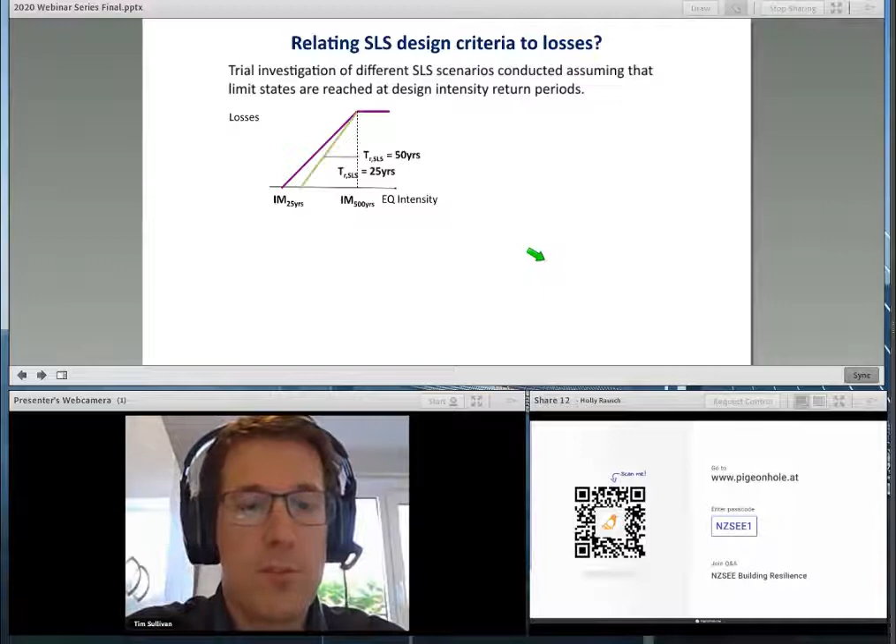So if we make that approximation, we can start to investigate the impact of different scenarios in our code—say having a serviceability limit state return period of 25 years, or 50 years, or 100 years—presuming, as an approximation, that the loss associated with replacement would occur at an intensity at which we have a 500-year return period shaking intensity.

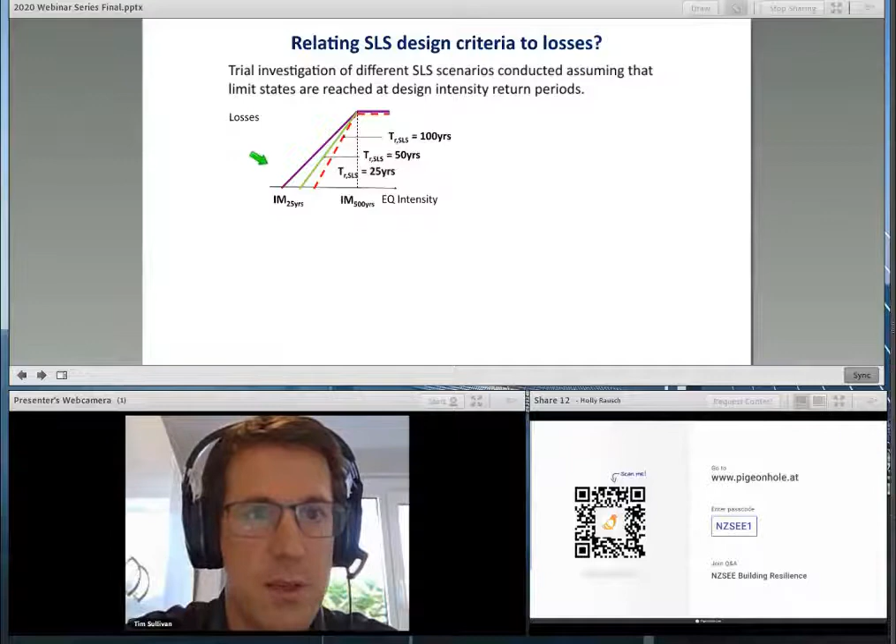Now, that's quite an approximation, but it does permit us to investigate how a change in our serviceability limit state return period could impact the expected annual loss. So we take this relationship between loss and intensity—for some reason I'm missing an arrow here, but anyway, it's a relationship between loss and intensity.

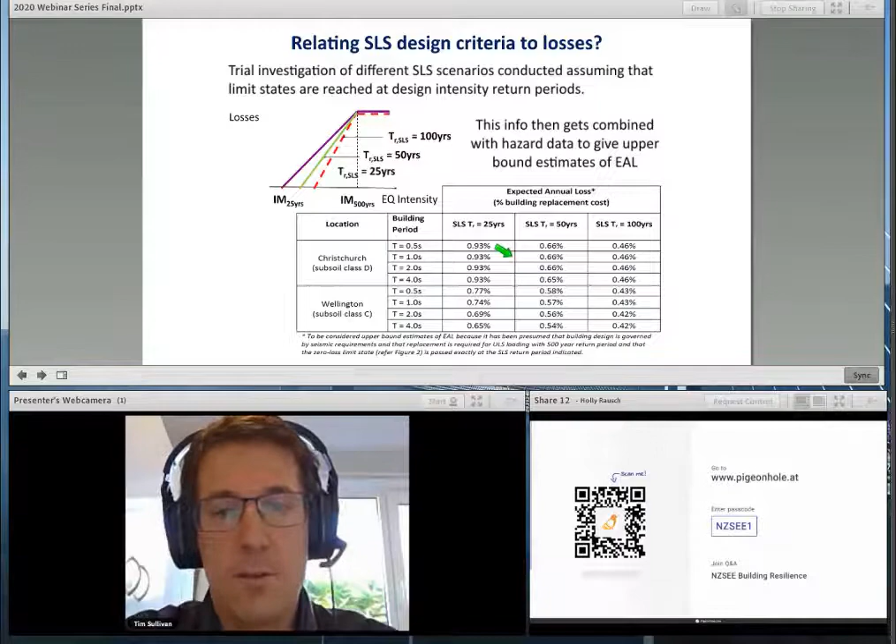We combine that with hazard data, and we're able to compute what the actual expected annual losses are for different scenarios. You can see increasing the return period at which we design for the serviceability limit state does successfully reduce our losses. The other thing we can notice from this sort of study is that the value of expected annual loss is going to change quite a bit according to the building location.

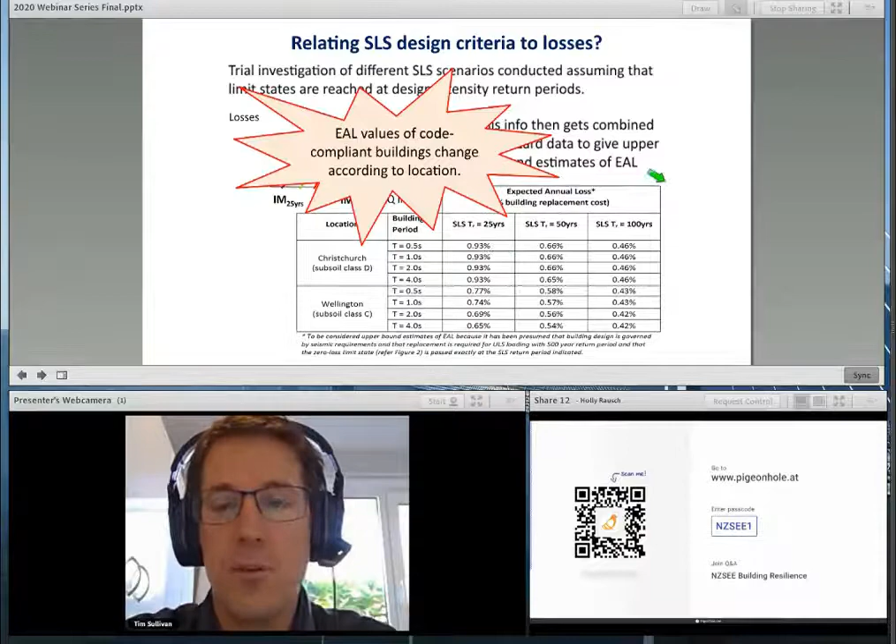So in Christchurch or Wellington, our code-compliant building losses are not necessarily going to be the same if we just design this way with a change in return period being the same for all sites.

Which then prompts the possibility—this is one alternative possibility—might be to consider a Z factor for the serviceability limit state, as we do have a Z factor for the ultimate limit state. We could do research to tell us what the Z factor for the serviceability limit state should be to ensure we have a limit to expected annual loss that's satisfied across the country.

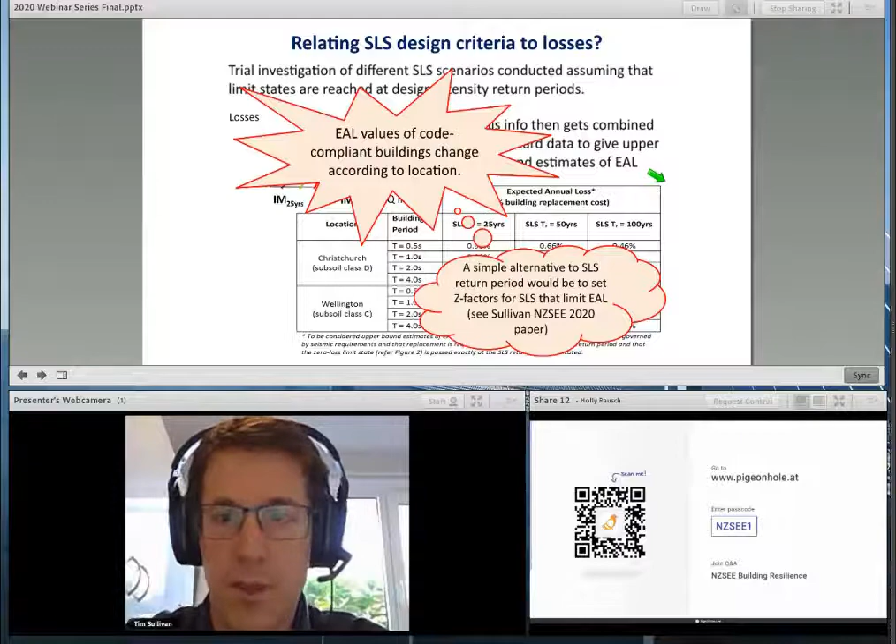What that's really suggesting is we don't necessarily have to design all for the same return period at serviceability limit state if we want to achieve the same outcomes in terms of losses.

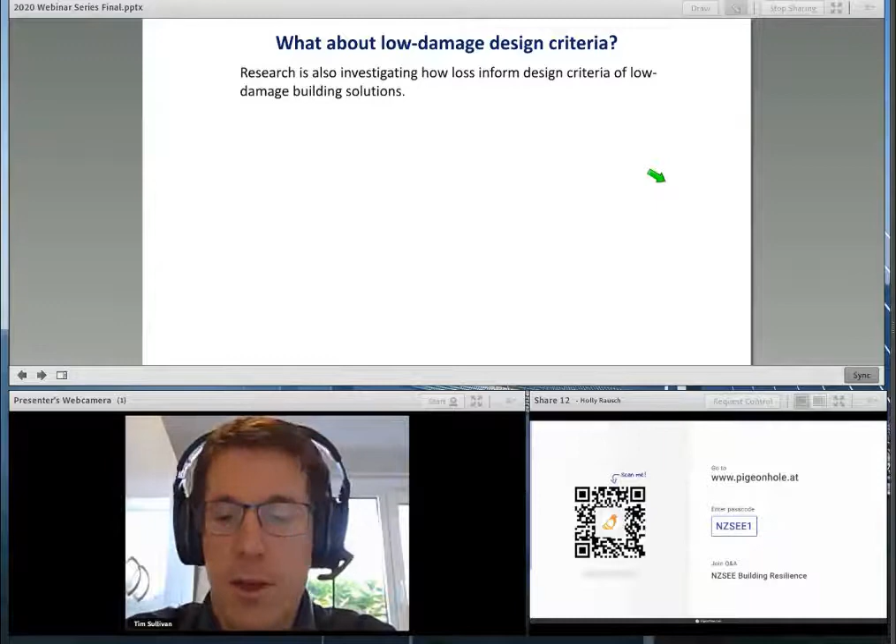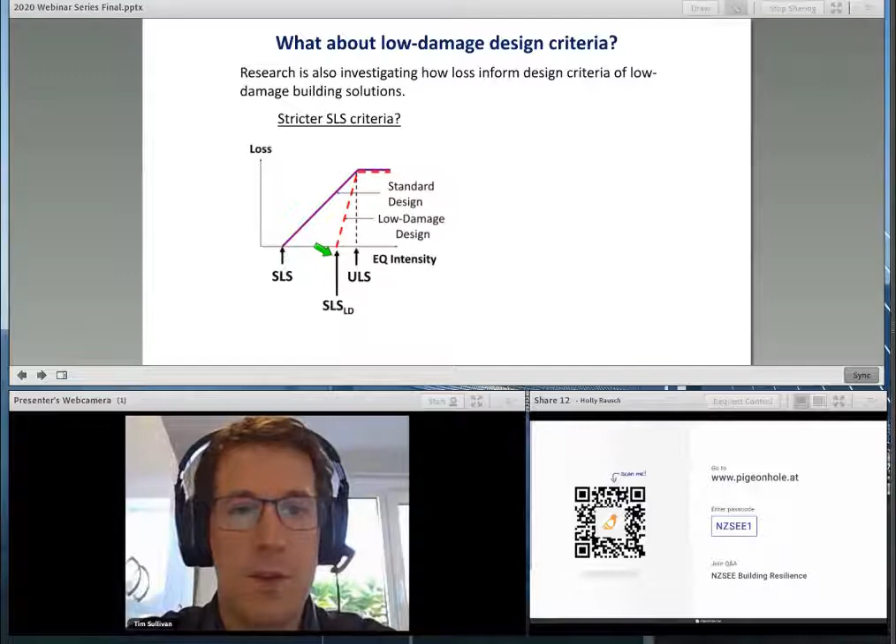What about low damage design criteria? Research is also investigating how we could inform the choice of design criteria for low damage buildings. One option would be to set a higher return period or intensity for shaking design at the serviceability limit state for low damage buildings. Another option might be to introduce a new limit state, keeping the serviceability and ultimate limit states the same, but adding one where the repair cost should be no more than 10% of the replacement cost.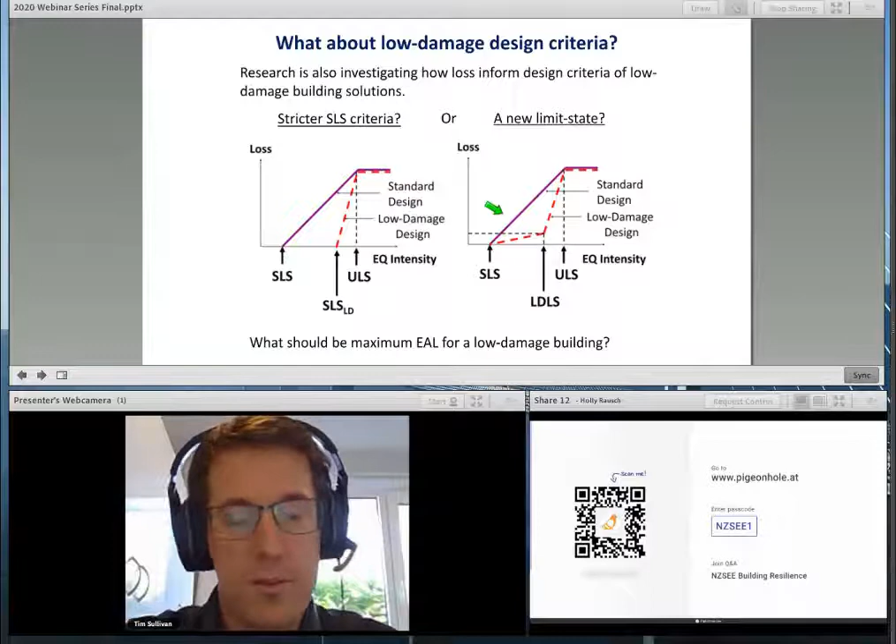With loss assessment, we can start to quantify how significant those changes would be in terms of expected annual losses. What is the difference then between a standard design and a low damage design? We rely on being able to set a number, though perhaps we shouldn't set a specific figure, maybe just provide indications. But we need to answer the question: what should be the maximum expected annual loss for a low damage building? Should it be half of a standard design building, or a quarter? What are stakeholders looking for?

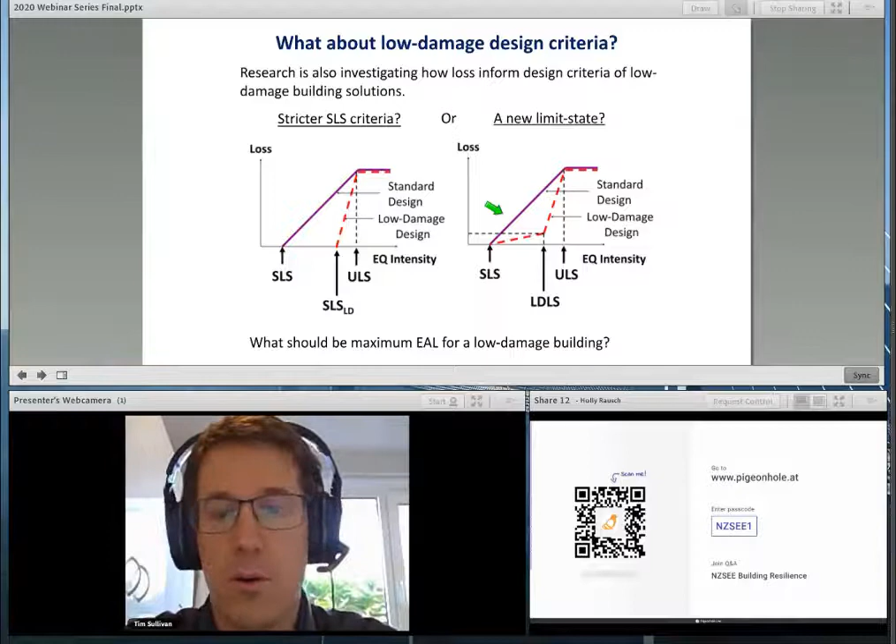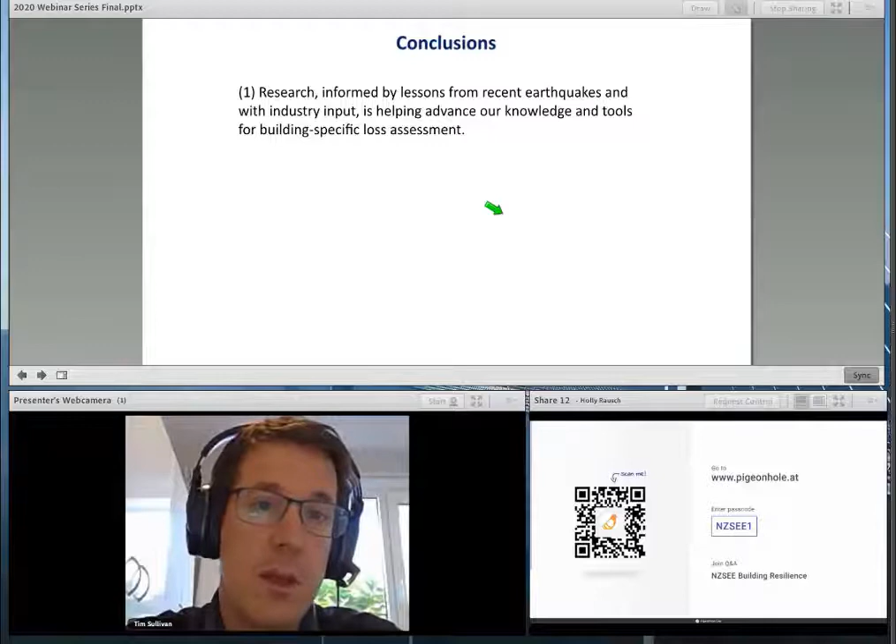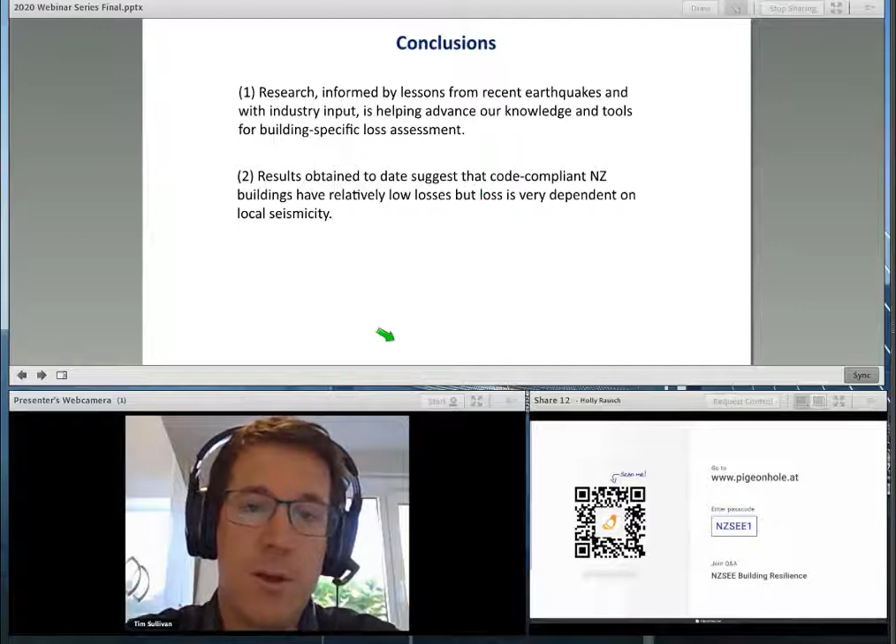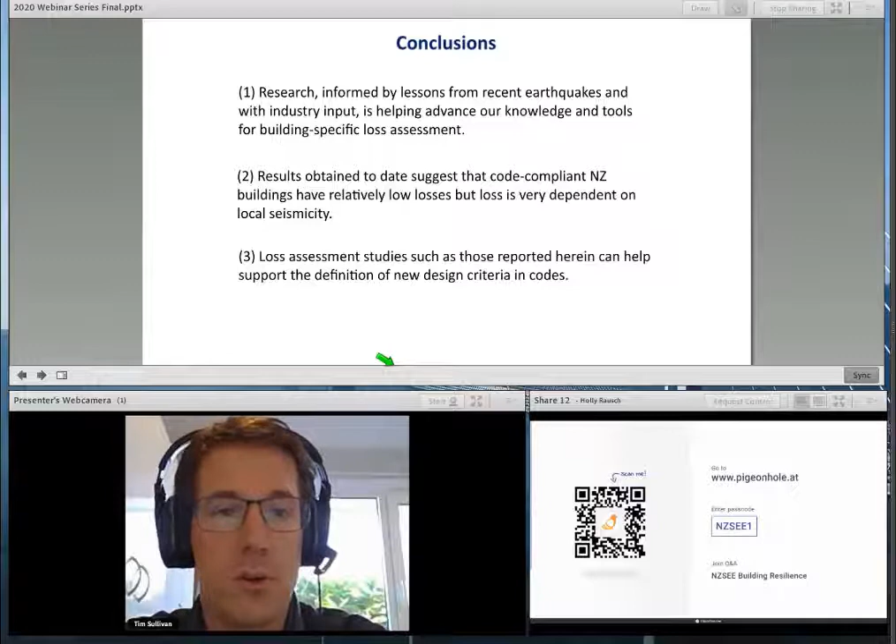So in conclusion, research informed by lessons from recent earthquakes and with industry input is helping advance our knowledge and tools for building-specific loss assessment. Results obtained to date suggest that code-compliant New Zealand buildings have relatively low losses, but loss is very dependent on the local seismicity. Loss assessment studies such as those reported here can help support the definition of new design criteria in codes, and we'll continue to do research in this area. So with that, kia ora and thank you, and I'm going to pass over to Rob.

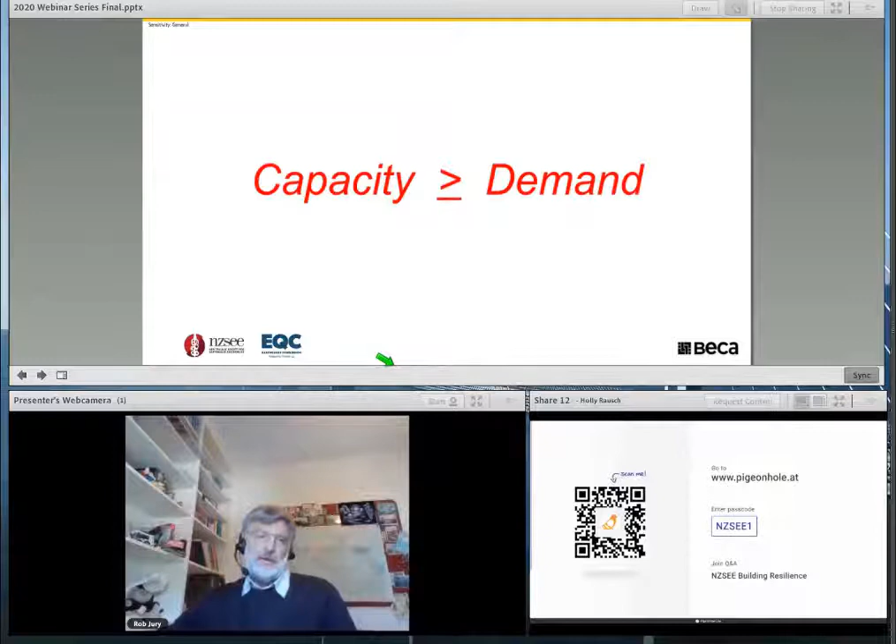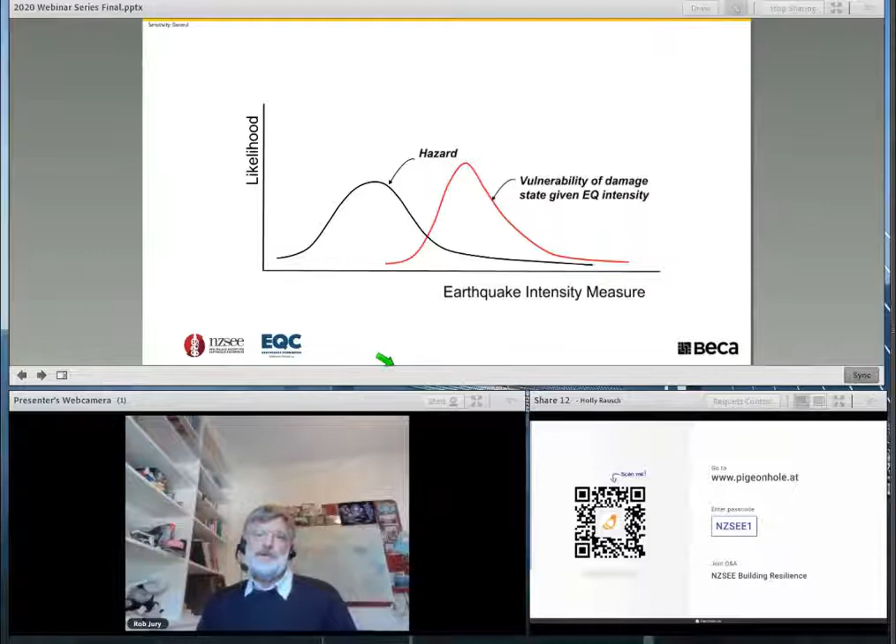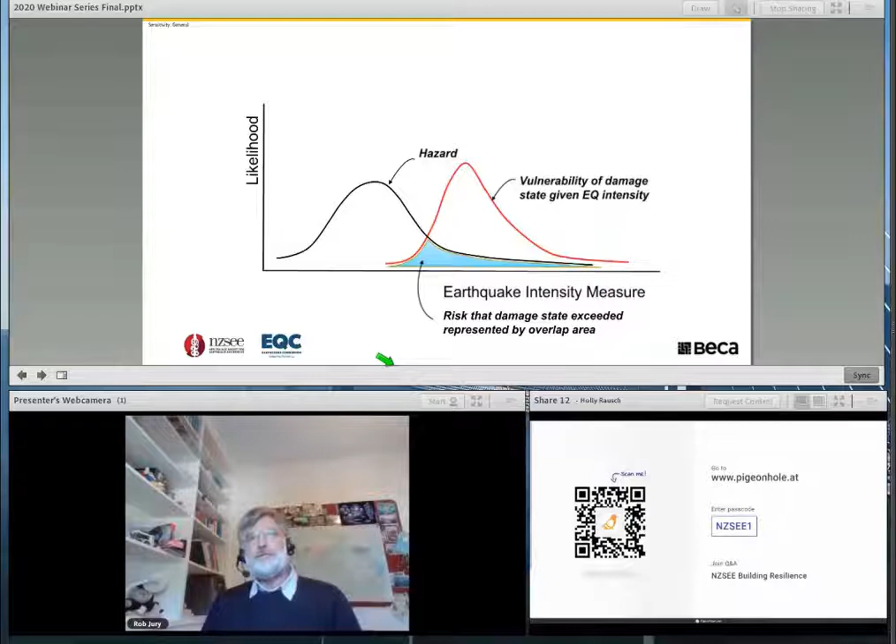I think many will be familiar with the concept of the overlapping probability distributions for the hazard and the vulnerability, and the fact that the risk is represented by the overlapping of these two distributions. But I think what we have to recognize as designers is that when we come to look at these distributions, they're not as simple as you might think, even putting them in the probabilistic sense.

There are lots of predictions for the hazard based on different premise, and there are lots of different estimates of the fragility or the vulnerability of a building or contents at a given level of earthquake intensity.

So you can see that while theoretically we can adjust the capacity so that we can adjust the risk, and obviously moving the capacity to the right of the diagram will reduce the risk, it is almost impossible to try and define actually what that risk is from a theoretical point of view.

And so we need to reach a consensus, I think, on where we set things, rather than necessarily expect us to be able to deliver from a scientific point of view where these settings should be set.

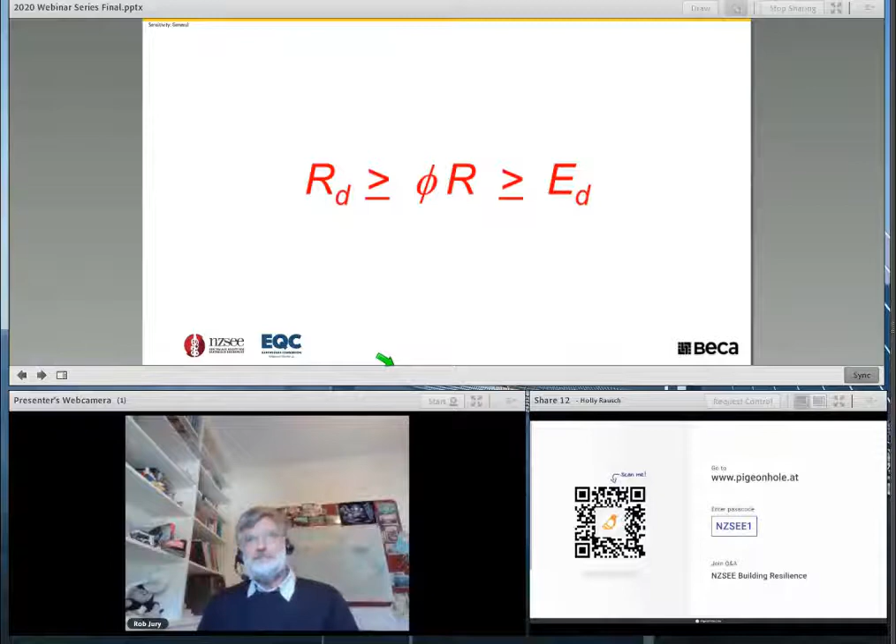And I think if we represent this on the probability diagrams previously, what we have are design points, and we have two design points which are currently: SLS1 at the serviceability level for frequent shaking, and the ULS for larger, rarer shaking.

There's been a lot of discussion, certainly over the last decade, about whether we should be introducing further limit states. Of course, the ULS limit state in our current code also deals with higher levels of shaking with quite a few of the provisions as well.

But if we think about other limit states, what we're really doing is introducing further design points for these limit states. And we're introducing them in a way where we are defining the earthquake action that we're thinking of for each one of these, and then we're defining the capacity, and the capacity will be associated with the distribution to deliver that limit state. There have also been discussions too about whether we should be introducing a fourth limit state, which is the MCE limit state.

I think as you go from left to right on this diagram, the ability for the engineer to be able to determine exactly what is being achieved in actual performance terms becomes more and more difficult. So that needs to be borne in mind. But the important thing is that we are, from a designer's point of view, designing to a number of design points.

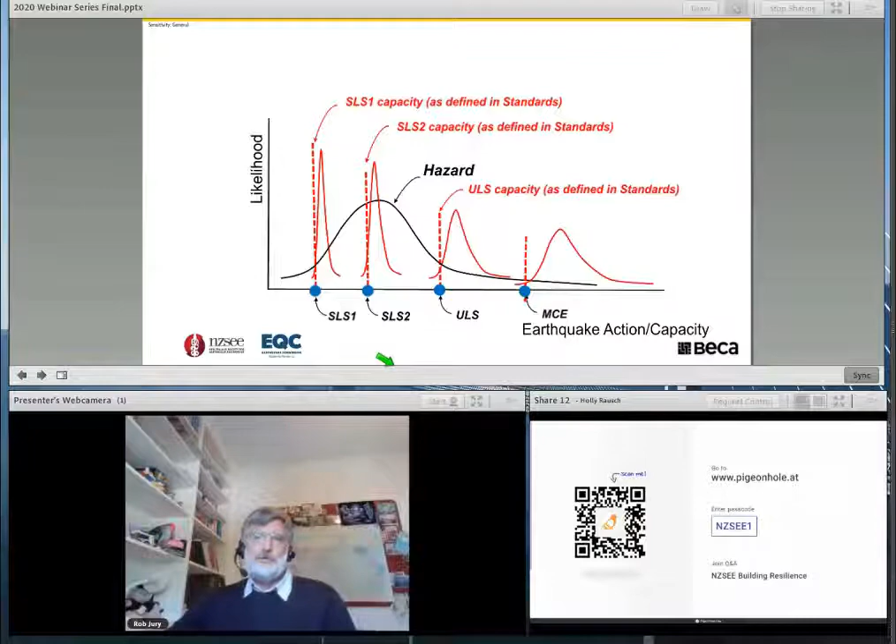So in terms of resilience, there are a number of issues and questions that come to mind that would have to be addressed. And these include that the building code is typically a minimum standard, so it doesn't necessarily set out what is a fully desirable state. It's a minimum state, and we need to bear that in mind.

And so that's what makes the programs that Jenni outlined in terms of the low damage design guidance so important, in order to give the ability to adjust the minimum standard as appropriate.

As Mike's laid out, it's primarily based on life safety, but I would say not completely. We do have a serviceability limit state. There are many who think it's too low, and Tim set that out, and I think that's an important consideration to decide where we're setting these points. And there are the case, obviously, for other limit states.

It's also important to recognise that it's relatively easy to design new buildings to a higher standard, but as Jenni set out, it is arguably much more difficult to upgrade existing buildings, which will remain for a long time the major part of our building stock.

Low damage options are available, obviously, but not all born equal, and I think we recognise this, so it's important to be able to understand what we're getting with particular solutions.

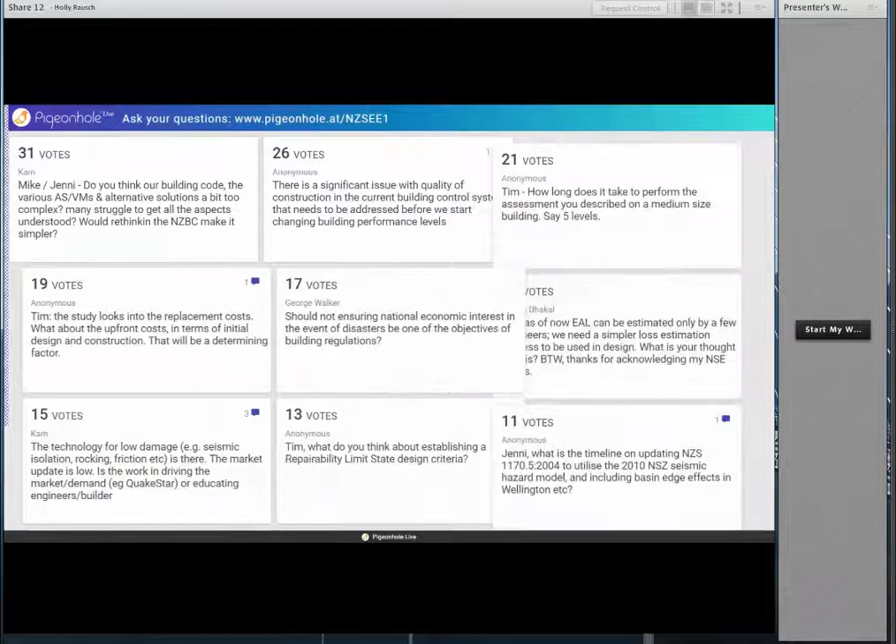I think there are a number of options. You have in the States, for example, different compliance pathways. Some of that can be shake table testing, but not everyone's going to want to take their elements out and pay for shake table testing. So there are also other pathways—it can be even just based on experience for a certain element, or some sort of minimum requirements, and only when we really need special performance requirements do we require more advanced specification and classification. So I don't have the answer for that yet, Ken, but it is a topic we're thinking about, and anyone interested to get involved, please let me know.

Tim and Rob and Mike and Jenni, there's an interesting question here about establishing a repairability limit state design criteria. I'm interested in your thoughts, all of you, on that idea.

That's, in fact, a good one for Ken, because in QuakeCoRE, we're currently waiting to hear the outcome of our rebid. We're hoping for QuakeCoRE to be re-supported again. And if QuakeCoRE goes ahead again next year, that will be a topic—not just repairability, but functionality is a topic we're looking to advance. Ken, do you want to add more there?

Yeah, I think understanding better whether or not we can repair a structure after an event is critical to achieving functional recovery in an event. Whether or not you can occupy a building in its damaged state, and then what the performance of a repaired building in a future design level earthquake would be—those are key questions we need to answer. I think the early results seem to suggest that a lot of our buildings probably are more repairable than we gave them credit for in Christchurch. So we need to learn from that, and obviously in that case it was heavily influenced by our insurance structure.